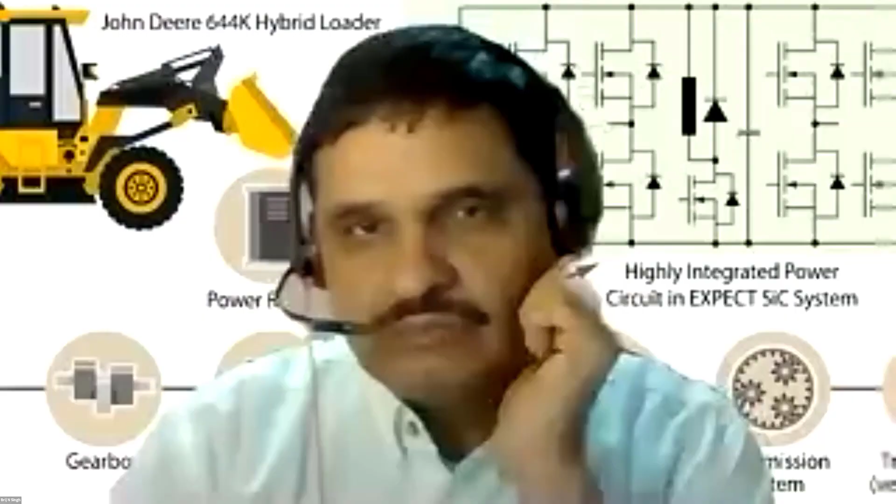I will turn the floor over to you. So Mark, you may go ahead and share your screen. All righty. While we're transitioning here, I just wanted to say thank you for the opportunity, and big thanks to the Purdue team for continuing to crank out really good talent.

So for the next 10 minutes, I'm going to provide an overview of why automation and autonomy is important to us at John Deere and our customers. As we get started, I want to share our mission statement or purpose at John Deere, which is to make our customers the world's most profitable and sustainable in their industries.

And what this means to our customers, and why it's important to them, is because they have a huge task in front of them: not only to be profitable and sustainable, but also to feed, fuel, clothe, and continue to build infrastructure for a growing population. This is a noble and real cause and mission that we're on to support them in doing.

So our farming customers - farming is a challenging job. There are lots of different variables that come into play when you are setting out to grow a crop and take that crop off the land. It's a race against time. Not only do you only get about, the average farmer gets about 40 times to get it right throughout their lifetime, but it's a timing race within each growing season.

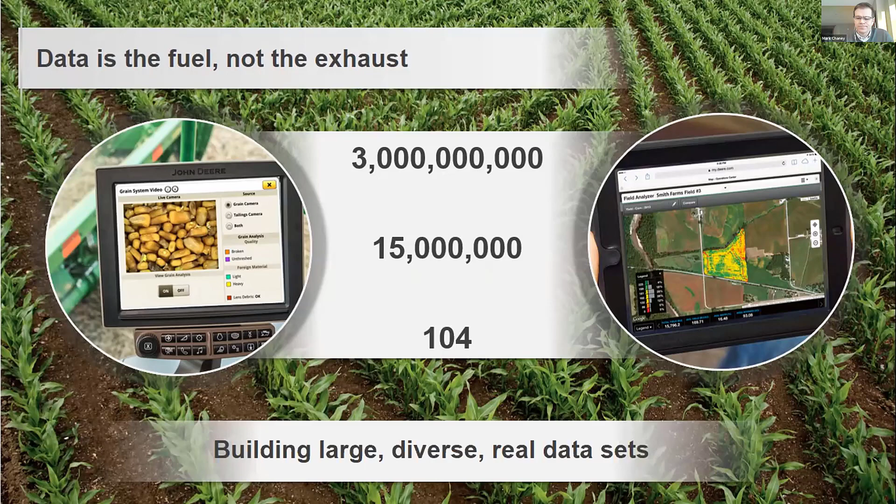From a decision standpoint, we are really changing the landscape of agriculture with the use of these new technologies. And whether it's at a field level, a plant level, or across their production system, we are starting to be able to make decisions in real time to aid them to understand when is the right time to get that seed

in the ground, or what's the right time to go spray for a pest. And all this builds, like I said, across each step to help them make the best crop they can make out of that season and when to harvest it.

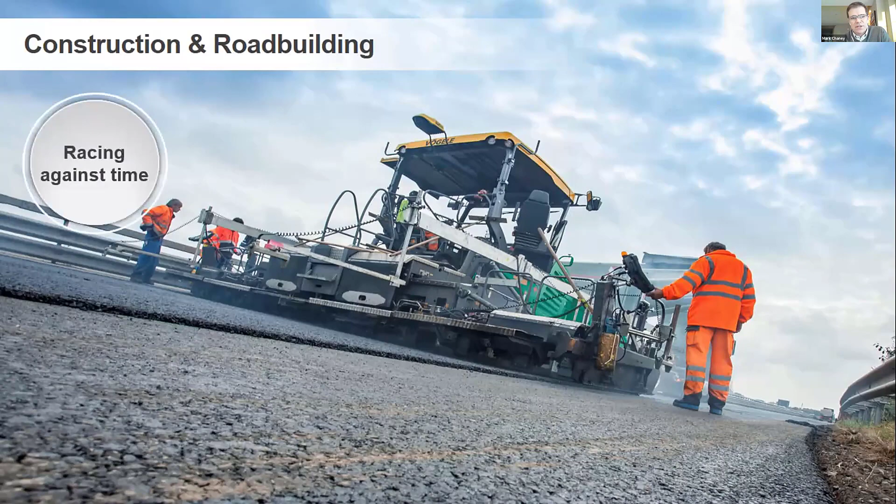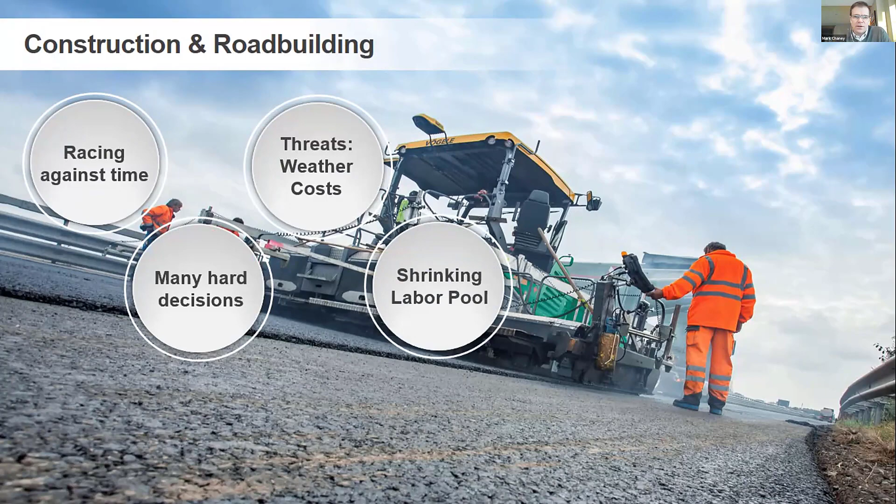Now switching gears to our construction and road building customers, you'll see some similarities here where they have very similar challenges, whether it's time, weather, costs, the decisions they need to make timely, and the labor. So a very similar landscape and challenges for them.

We are also working with them to bring this technology into their industries to do much of the same, as the need is great. They are fighting different challenges than our ag customers, but we are actually leveraging a lot of the same technologies across their businesses as well.

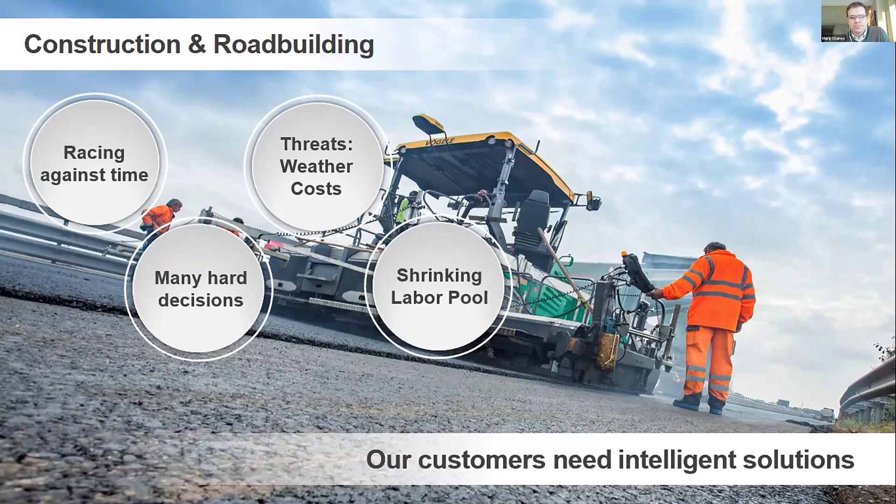Safety is a big deal with our construction and road building customers, and it is one of the number one areas we are working on with them to apply this technology. And that is why you see one of the technologies in front of you here, where we're leveraging a technology that can look behind our equipment, provide alerts when obstacles are near. And this is just the start of this.

Just imagine how we can continue to apply computer vision and machine learning technologies to make job sites and work sites safer.

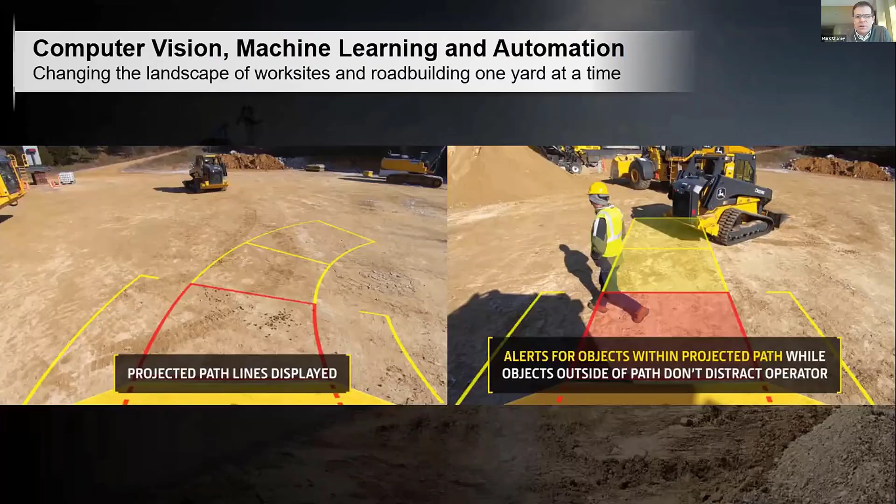Now I want to show you a little video about our acquisition with Blue River Technology and the work they're doing to revolutionize agriculture.

We're seeing lots of resistance to Roundup. We're looking for other ways to combat the weeds and still have cost savings on top of everything.

We saw an opportunity to take cameras, computers, and artificial intelligence to allow ag machines to see every plant in a field. We thought we could give farmers the ultimate flexible tool to treat and manage their field in whatever way they wanted, by having knowledge of every plant and its situation, and an ability to spray very precisely, whether it be herbicide only to the weeds, or fertilizer or fungicide directly on each plant that needed it. Each field has a different set of conditions, and they need to adjust and correctly set that machine's performance for the field.

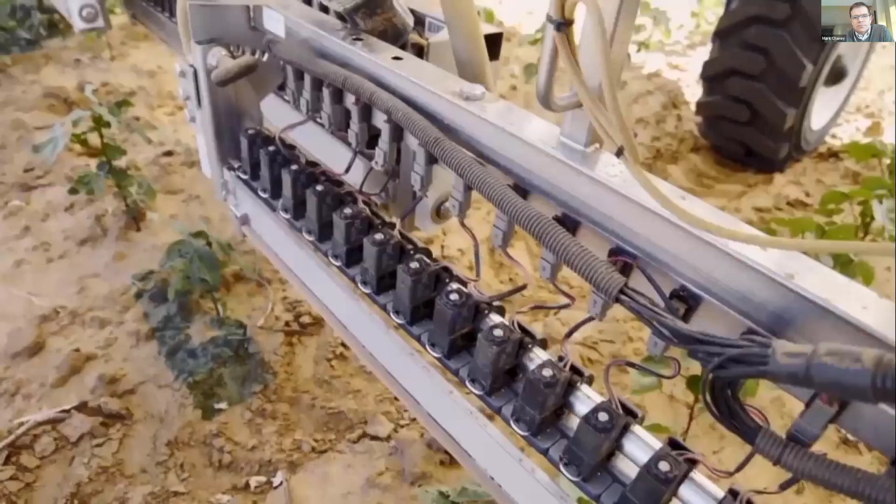One knob could be the protection of the cotton plant and how big of a buffer, a safe zone, we provide the plant so that when we apply selective or non-selective materials, we have the appropriate buffer.

Another dial is how aggressive do you want to be at going after anything that looks like a weed. There's also opportunities to inform the grower of how many weeds the system's seeing, even what kinds of weeds exist in the field, so they can start to tailor their herbicide programs towards those weeds.

The cameras and computers on a See and Spray machine use deep learning algorithms similar to what's used in facial recognition. The first time we saw a pigweed, the machine didn't know what kind of plant it was, but we taught it by giving it tens of thousands of examples of that pigweed, and now it's an expert in pigweed.

We save up to 90% of the amount of herbicide that you would spray if you were spraying the entire field. The weeds have become a little bit more of a pest than they were originally - they've become resistant to a lot of the herbicide we've been using on them.

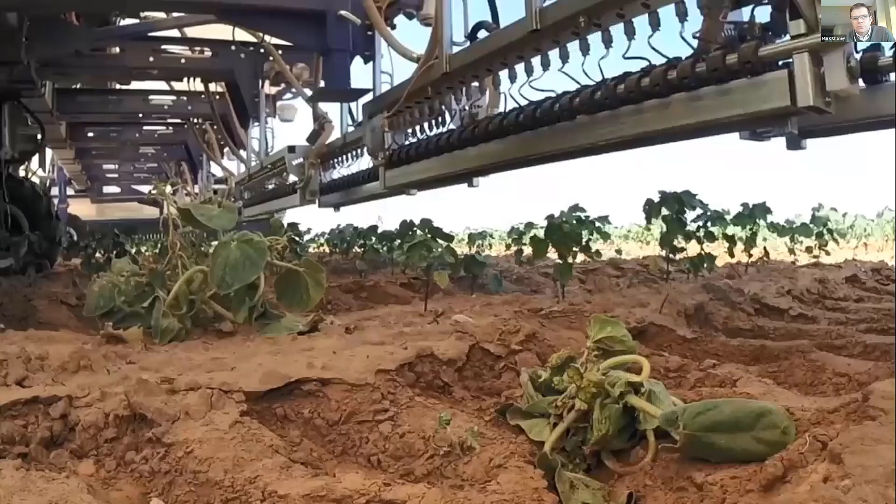With the rig, we have other options open to us. We can spray different chemicals that we weren't able to spray before. We can take one man, put him on a tractor, and do the work of 8 to 10 people. We're seeing no end to the use of this technology.

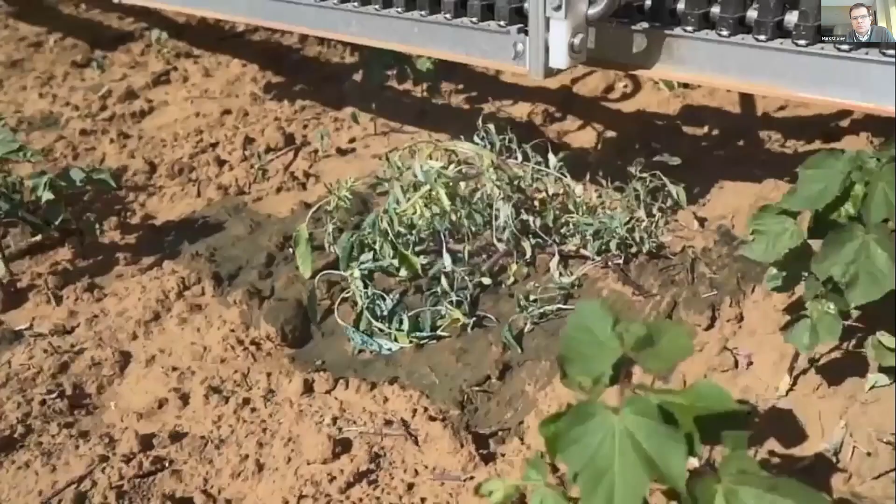Essentially, anything that may be cost prohibitive or more difficult to do when spraying on a broadcast basis becomes much more grower-beneficial if we're spraying on a very precise basis.

So you can see tremendous opportunity for us there, and some awesome work being done by the teams at John Deere and Blue River to revolutionize our future in ag, construction, and road building for our customers.

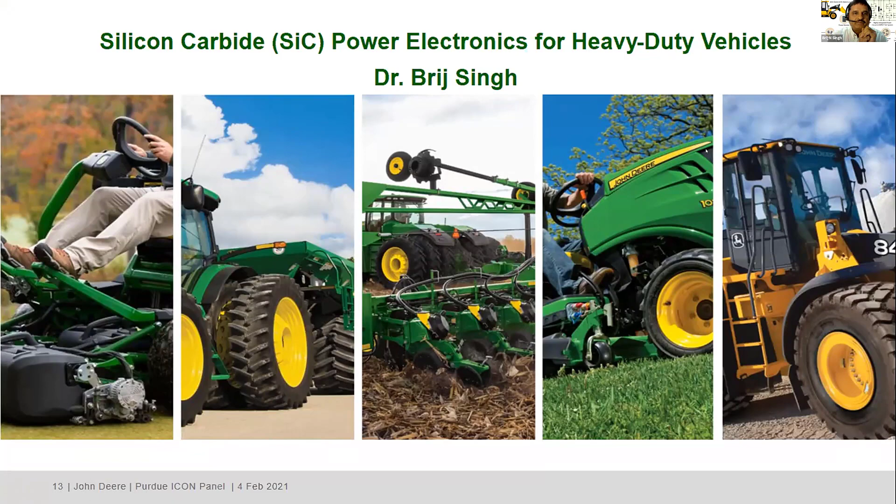So we are committed to those linked to the land - that is our slogan. And it's a demanding application of power electronics. Failure is not an option for our vehicle, because when a vehicle goes down, there are numerous other vehicles waiting for it, so everything is down. Failure is not something we think of.

Whether it is silicon or silicon carbide, customer expectation is high. It doesn't matter whether you are putting in new technology or adding something additional to the existing technology - you just cannot get away from customer expectation. So what that means is we have to have ruggedized power electronics with enabling control technology so we could pass on customer value.

And I'm not going to play the video, but using this link you could look into the various aspects of this vehicle. Next slide.

And this vehicle, as Mark is advancing, has seen at one customer site 1 million field hours, that established the reliability of the vehicle, the power electronics that we developed in the 2007 to 2010-12 time frame. Control system prevents near zero speed, tire spin, and slicing.

The reason is that this is one of the core benefits of electrification that we did not initially think of. So in emerging or advanced technology development work, we oftentimes find the customer value when the product gets in the field. If there's any possibility, some of these things can be understood upfront. This vehicle has established industry-leading reliability goals through advanced control, power management, and all that.

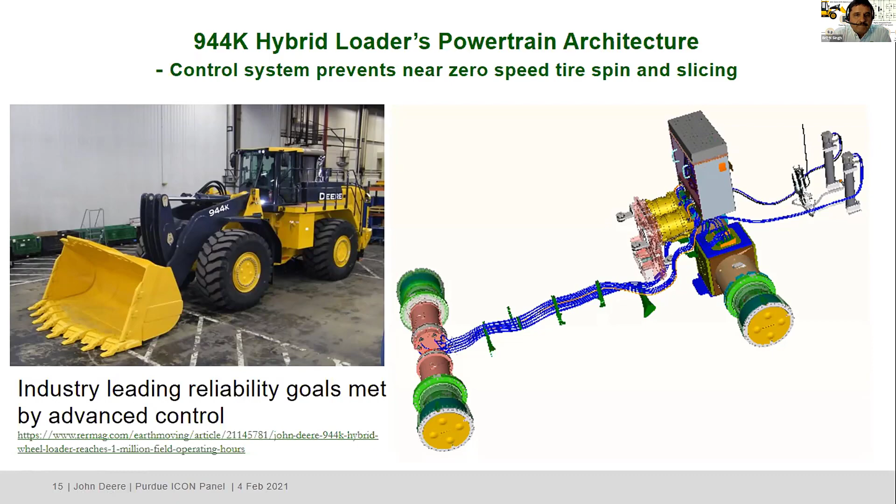So when we began silicon carbide technology development work in 2015, we were given a very aggressive target. It was funded by the Department of Energy, and we had not done anything silicon carbide related before. Silicon carbide is a very advanced material with its own challenges related to packaging, thermal management, and gate drive, and things like that. So I'm not going to read all these numbers, but there's a very high efficiency target, miniaturization of the powertrain - it's an extremely power dense converter.

In addition, we're going to engine coolant, because in our vehicle there are numerous cooling loops, and every one of them has its own, what you'd call, risk options - like failure could be a possibility if you have a dedicated cooling loop, particularly an electrical pump. So the idea was that if we could eliminate the dedicated cooling pump for the inverter, that would be a big value, particularly for system integration. So we qualified this inverter to run on engine coolant up to 115 degrees C.

So what I'm talking about here is 130 degrees C ambient electronics, and that has to meet that 1 million field hour reliability, right? So this is an extremely challenging problem.

Silicon carbide advanced technology is an emerging technology for off-road vehicle applications. There are some risks - one risk is that it's new in our field of use, because we've established a leadership position in electrification. For agriculture, we're doing the ExactEmerge planter, which Scott will talk about and Mark has mentioned, and also on the construction side. So we want to retain that position by working on advanced technology, mitigating risk, and understanding supply chain issues. Once we've established the competitive advantage, it can be put to greater use.

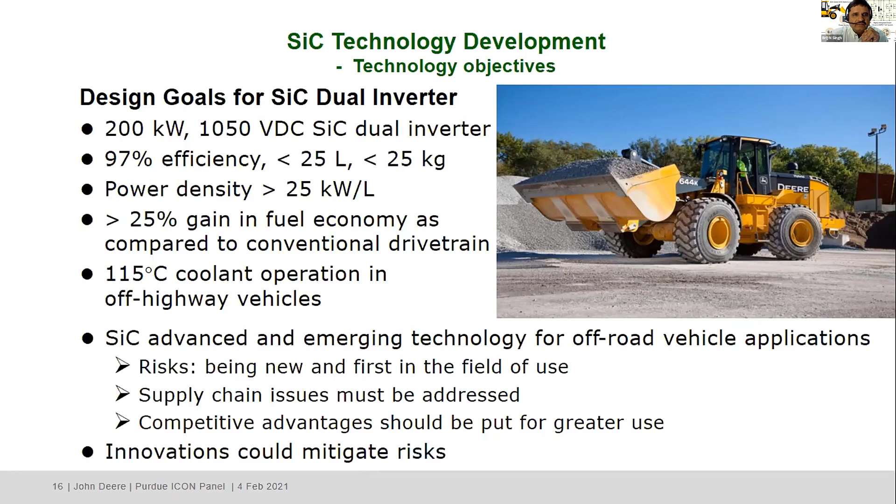So what you see here is the progression of power density. Looks like on my side two boxes are missing - I don't know, Mark, if you have it or not, but you have a PDF copy of this presentation, so you can look through that.

So if you look at these inverters, all of them have identical capability, each 400 kilowatts. And from one inverter to another, every 5 years we are cutting inverter size in half and increasing their power density, coolant capability, and also performance. At the same time, we are reducing the cost of these inverters, which is an extremely challenging problem. But it comes with a benefit - the smaller it gets, the better it becomes.

What that means is, since we're not a very high volume business, once you establish one inverter and pay down all the development cost, software, and everything, you could use the same inverter, same hardware, to capture many vehicle applications - that's what modularity means. So all of a sudden you start enjoying the economy of scale.

Increasing power density gives competitive advantage. Why is that? If the box is smaller, it's a lot easier to put it on the vehicle for system integration. It's not just an inverter, it's going to enable a vehicle function. That's why miniaturization is extremely important.

It comes with its own challenges, particularly packaging and thermal management. In addition to that, there's the control aspect and qualification and things like that. And improved performance at high temperature gives system benefits. As I said earlier, engine coolant elimination makes the vehicle system integration much easier.

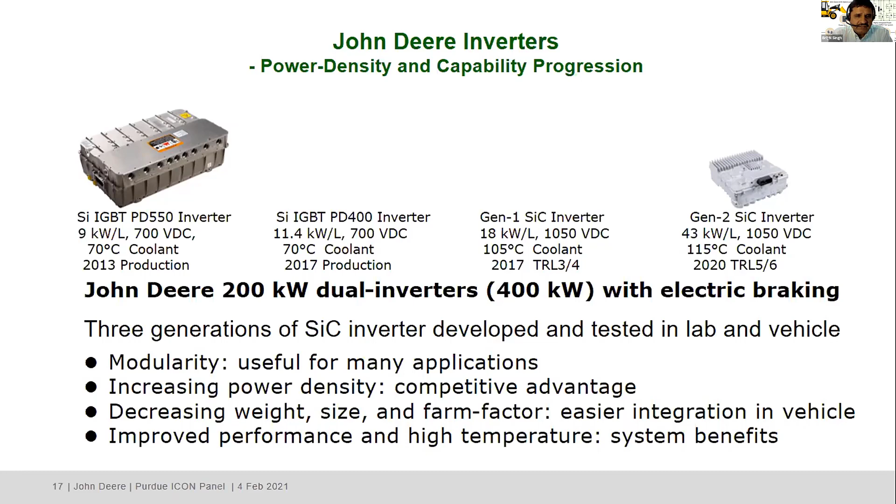I want you to comprehend the scale of this. So you can imagine this inverter has gotten so small that you could measure it in terms of an iPhone. I was curious when this box came to me, and I measured it against an iPhone. They are reducing in size and weight, and it's comparable to an iPhone now - less than an iPhone in height, two iPhones deep, and left to right almost two iPhones. So it's very, very small.

What I'm trying to indicate is that maybe the next inverter five years down the road may look similar to an iPhone, and that's where the Department of Energy is also heading. We have 43 kilowatts per liter power density. The Department of Energy's next goal is 100 kilowatts per liter power density.

If you look at per capita US energy consumption, it's 10 kilowatt-hours per day per household. What that means is this box, such a small box, can process electricity worth 40 houses. Now comprehend a power substation around a house - how big that is versus this little box can do that.

On top of that, this iPhone-sized power module inside can handle electricity worth 20 houses. Now you should comprehend how challenging the packaging, thermal management, and control problem this has. We are trying to solve these through innovation.

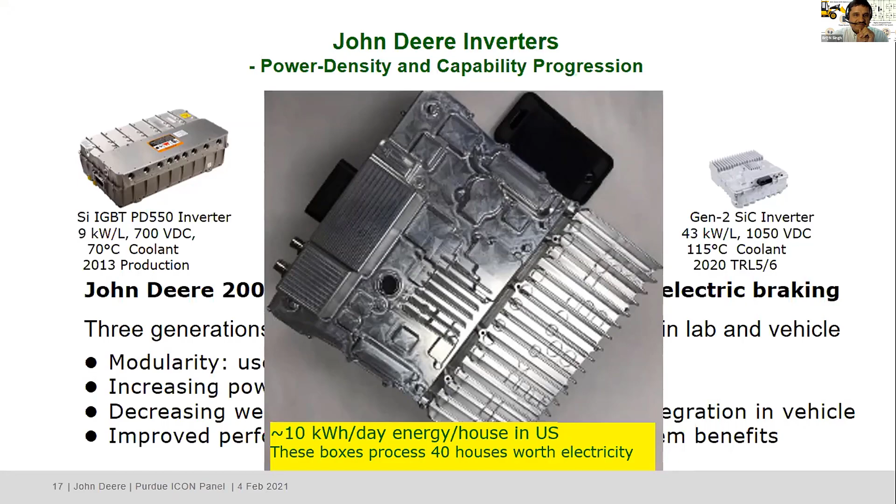This is basically the comparison of all our three inverters. When we began in 2015, this is another aspect - when you're working on a technology that may have risk, with not a lot of data out there, how do you mitigate that risk? This project taught me that.

What we did was take one of our IGBT inverters and did impactful work very early on. That means with no knowledge in silicon carbide technology, control, packaging, thermal management, devices, gate drive, and all sorts of things, within 9 months we were spinning an electric machine with the silicon carbide inverter. That tells you that very early on we were mitigating risk and putting our resources toward it, and time is of the essence.

So if there's risk and you could mitigate it, and you found out that no, this is not mature enough, maybe we should slow down our development progress. This project taught me that - mitigate risk very early on, and then intensify development effort.

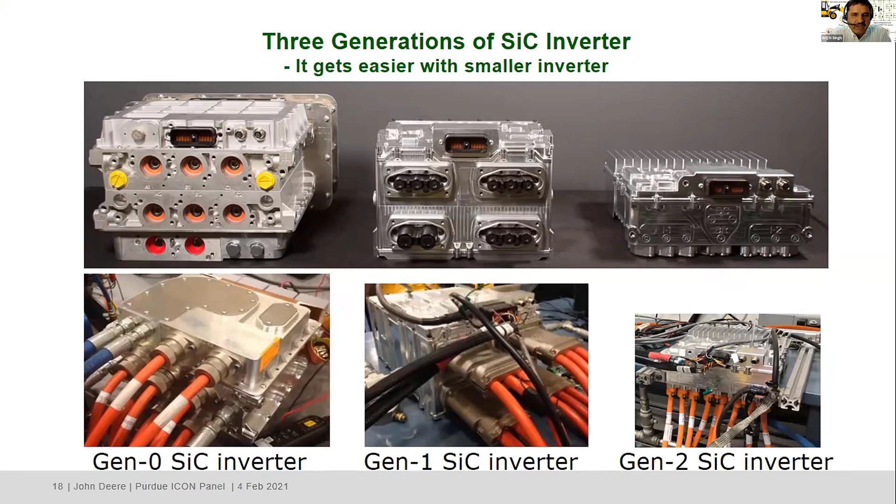Within 4 years, we've gone from a very huge box on the left to a very miniaturized inverter on the right. Look at the bottom three pictures - how much easier it is to connect the inverter with the motor or electric machine. It's easier integration on the vehicle, and miniaturization gives that advantage, but it doesn't come free. It comes with a lot of challenges - solving thermal management, packaging, control aspects, all that.

I often get asked: these are hybrid vehicles, the 644 and 944 loader - what is the battery size in this vehicle? The answer is there's no battery, only the start engine, a 12 or 24 volt battery. The reason is these are energy guzzlers. As I said earlier, the 944 consumes 9 gallons per hour of fuel; the 644 may take about 4.5.

You just cannot get a battery to keep working for 12 hours, and the 944 may work 18 to 22 hours non-stop per day. So what that means is you take this drivetrain - engine, gearbox - generate electricity on board, and then the transmission system, that's where the magic happens. This gives the operator huge flexibility through vehicle power management. Automatically, software algorithms control and let the operator pay attention to the work versus how the vehicle is operating. So a lot of automation is helping us make the operator much more productive and performing, versus paying attention to how the vehicle is working.

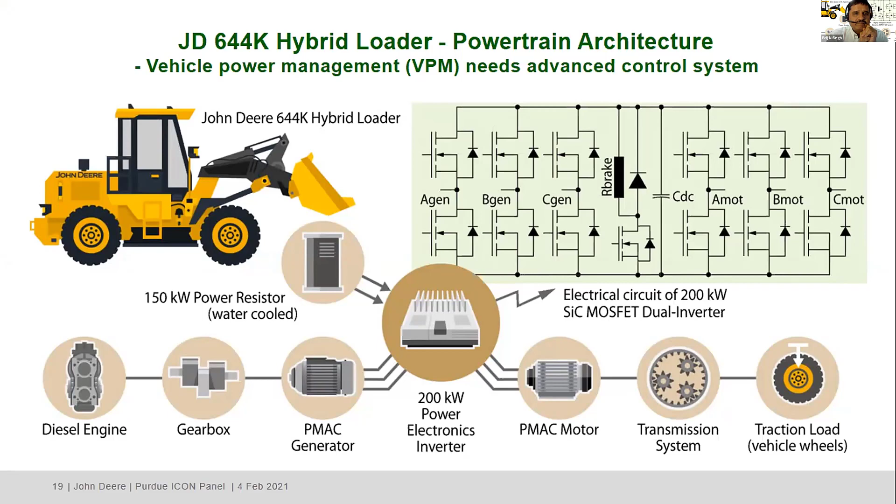So that U4 boxes that you saw, PD550 to Gen 2 silicon carbide inverter. What we did for miniaturization, one aspect was we reduced the amount of capacitor we put on the DC bus, going from 13,000 microfarad to as little as 440 microfarad without compromising performance, capability, and all aspects. How could I verify that yes, that is the right thing to do?

So we do a lot of simulation, hardware in loop simulation, Simulink simulation, followed by some experimentation in the laboratory, and then improve our control system, hardware, and all that. And that's how we checked out that yes, indeed, going from a very high value capacitor to as little as 440 gives us a power density advantage.

But then in addition to that, if I want to change torque 1000 Newton meter per millisecond, because that's how operator expectations are, customer expectations are, how can this do that? There is a lot of advancement in software needed to make sure that yes, this little capacitor, 440 microfarad, is good to go.

And what we do, basically, is a multi-machine, multi-inverter setup to pretty much simulate vehicle condition in the live environment before going and putting hardware in the vehicle. Next slide, please.

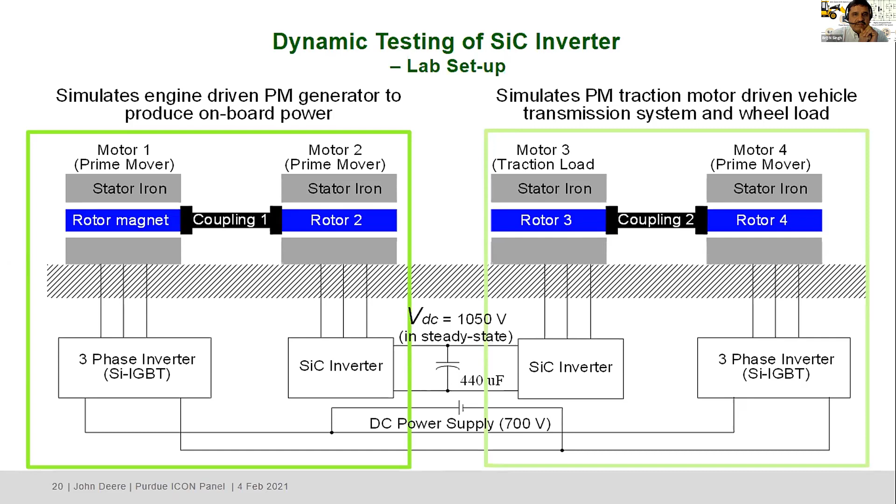Next slide, please. We have 14 such dynos in Fargo, North Dakota, where we do electrification related development work. The vehicle operator, particularly construction and mining vehicle, day long, they are going high power to low power, stop, start, as you're digging the pile, which is very, very taxing on the power electronics. So it has to be ruggedized to withstand those operations.

So testing it, if I quickly change the power from 30 kilowatt to 150 kilowatt, what happens to the particular DC bus, because it has to remain stable to provide 1000 Newton meter per millisecond torque change. And we found that yes, we can minimize that capacitor as little as it could be, and it reduces the inverter cost, makes it power dense, but at the same time, no compromise in the performance.

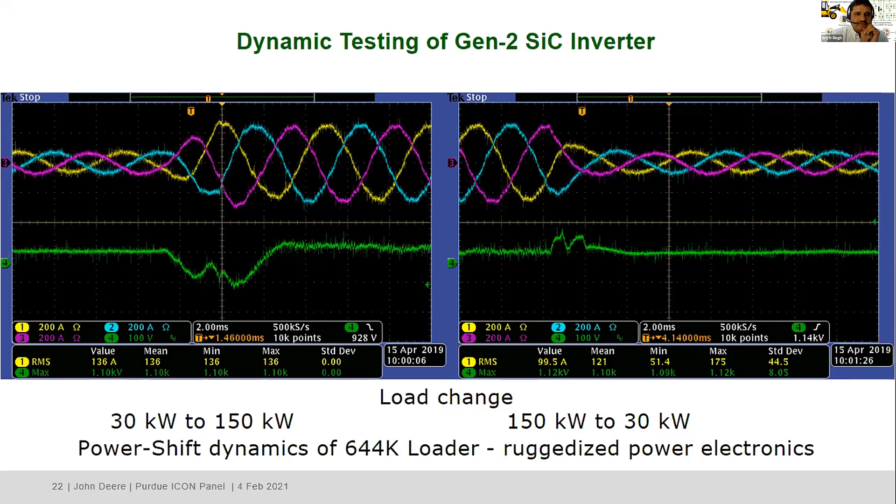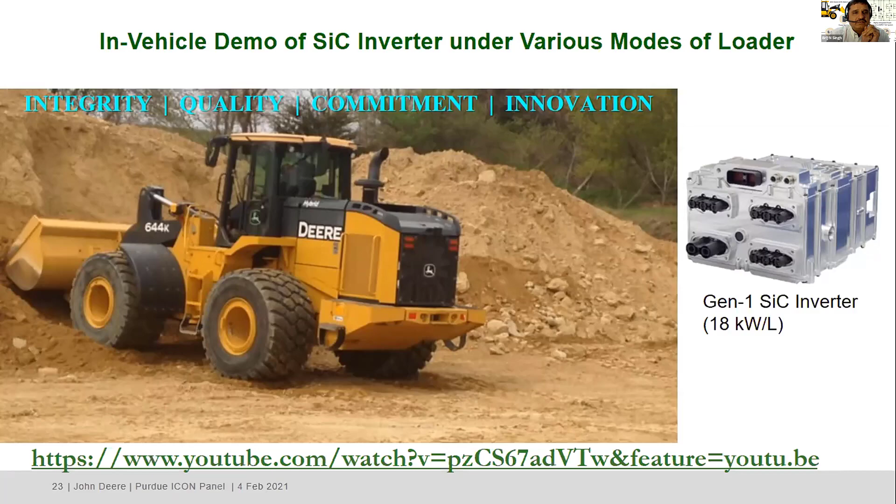So in conclusion, silicon carbide power train is real. That's what we found out by doing a lot of benchtop testing, back-to-back dyno testing, in-vehicle testing, and we have roughly 3,500 hours of experience.

We believe that if you take a system approach, we could get, by 2025 or so time frame, this technology will start competing, but it could go into some niche application, like a battery powered vehicle could be one application, or maybe where motor inverter integration are a must, there it could go.

And then another aspect, from supply chain, we found that as compared to silicon, the traditional state-of-art technology that we have in 644, 944 loader and other vehicles we're working on, even if there's a 3x cost at the device level, at the system level we could get a cost neutral or cost superior and performance superior solution. So we have to take the system approach to do that.

And certainly there's a risk in this new technology, because on highway, like a Tesla Model 3, will be there. But in our industry, nobody has a record of proving this technology on the vehicle. So there is certainly risk of doing this emerging technology. But this risk, if you mitigate that, this gives us competitive advantage that outweighs the risk of being new in the field. And then we want to retain our technology leadership in electrification.

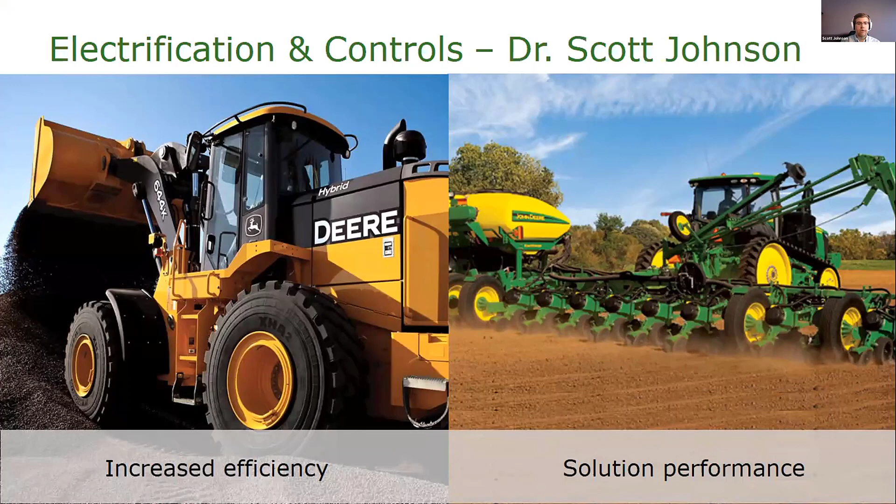In terms of power management, the goal once we've electrified is to get the performance that a customer needs. Keep in mind these customers are staking their livelihood on this vehicle - their day-to-day income is coming from a vehicle like this. So it's critical that they still have the performance they want. With electrification, we've actually added some performance. In particular, for a customer, they care about how much they can put in that bucket, and the power you can put in the fingers of that bucket really makes a difference.

So how can we deliver power from this powertrain to do that? I mentioned the 4 wheel motors - there are 2 generators on this vehicle powered from the diesel engine, and we call this vehicle a hybrid. You might ask, where's the battery on the vehicle? The answer is we don't need a battery to do things like energy recovery, because even though we're aggressively filling a bucket full of dirt, backing up and going forward again, we have loads - places to use the power we can regenerate. We have hydraulic systems actively lifting that bucket that we can assist with the energy we've recovered from the wheels. So we can improve efficiency without a battery to store it, because we're still net consumers of power.

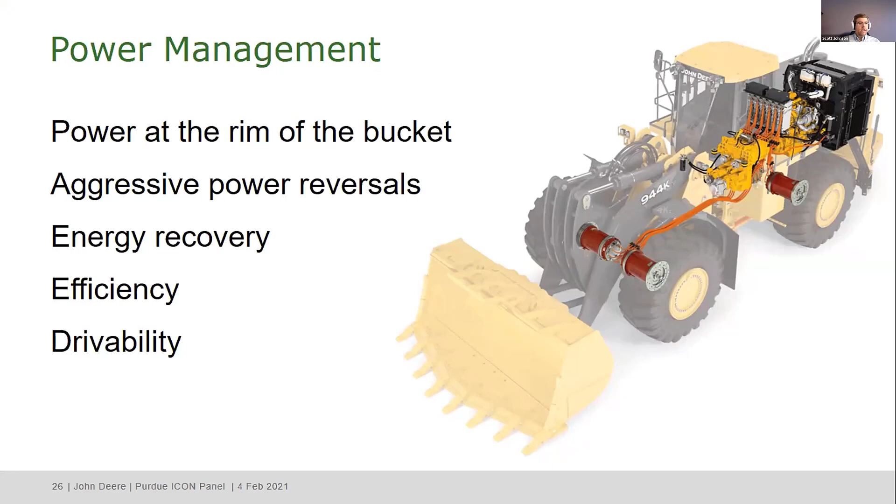We also have other dynamics we have to deal with, like buildup of corrosive materials when people clean the vehicles, or things like grass clippings for our electrified golf equipment, which can cause plugging. We have to figure out how to design the algorithms to either push through or protect the mechanical equipment so it can be cleaned and not be damaged. Extreme cold, dust, debris—robust controls and robust power management are a really cool aspect of working at John Deere that I have enjoyed.

The variety of the different applications and getting dirty going in the field is also pretty fun. Typing a couple lines of code and then feeling the vehicle move differently—not every company you get that. So if you can go to the next slide for me, Mark.

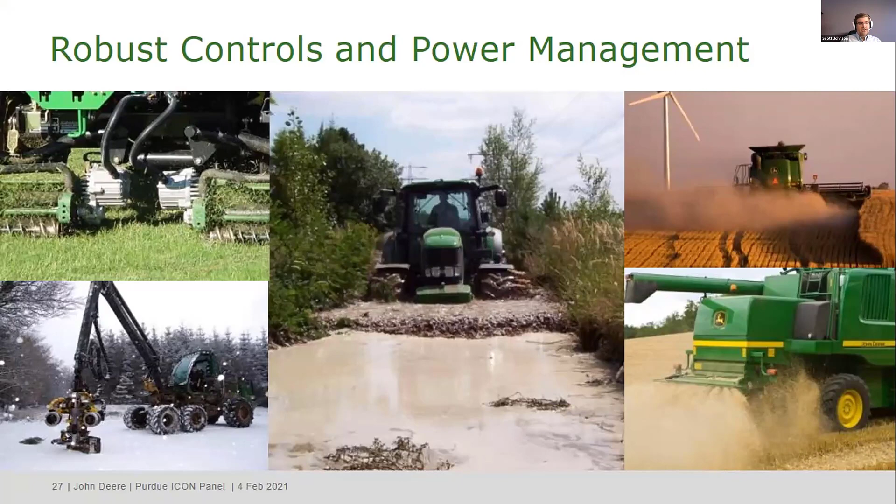Switch gears for a second here, talk about precision ag. The ExactEmerge planter is our premier planter today, and it's used for row crops. Critical to these customers is the precision planting of those seeds in spacing and in depth. Everything about how that seed goes in the soil is critical to how that seed grows and then how much yield we get out of it. Corn and soybeans are typically what's targeted, but this plants other seeds as well.

To get an idea, an average farm will have 350 million plants in it. This planter and tractor can plant 700 corn seeds a second, or 2,800 soybean seeds a second, while running 10 miles an hour in a field. And if that doesn't feel fast, put yourself in a tractor going 10 miles an hour over this kind of off-road terrain—you'll feel like it's faster than you expected. I'll put it that way.

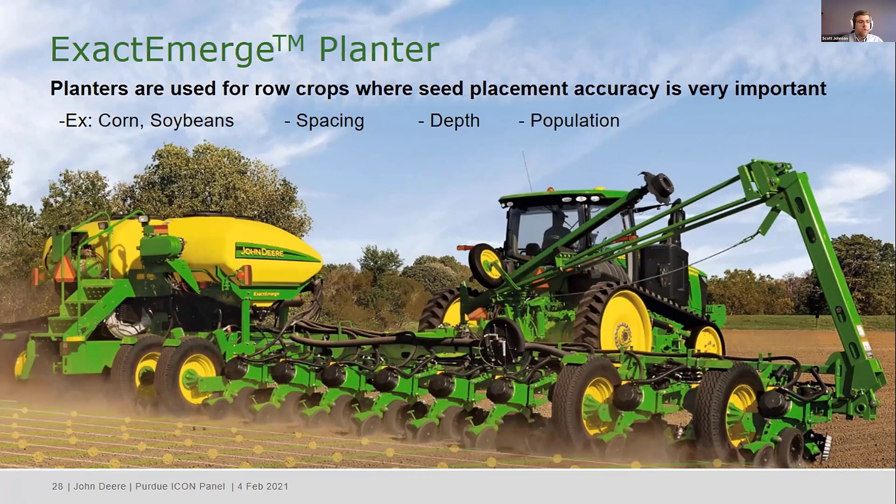It is incredibly fast. But even while we're going that fast, we're able to keep the precision planting of those seeds at the desired 6-inch or 7-inch spacing. And that's where the controls really come in. So if Mark, you can go to the next slide, we're going to see a video here just to give you a picture of the components of this, and we'll talk through a couple of things. So yeah, go ahead and play it.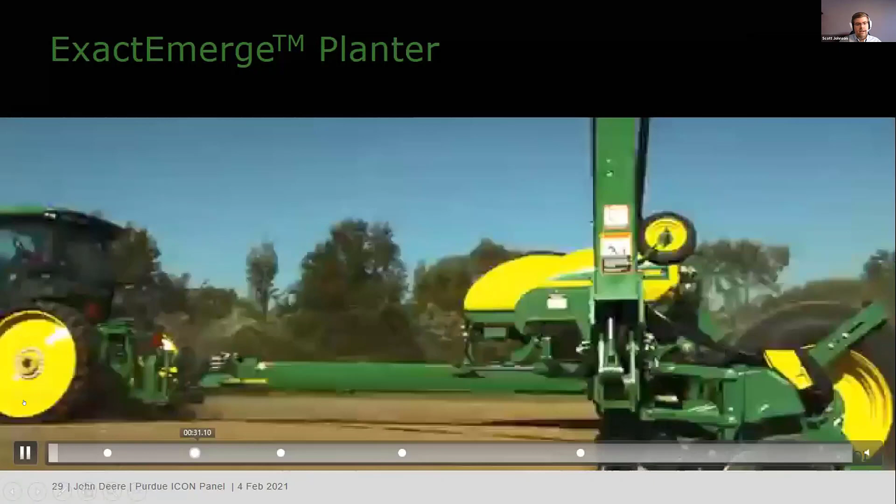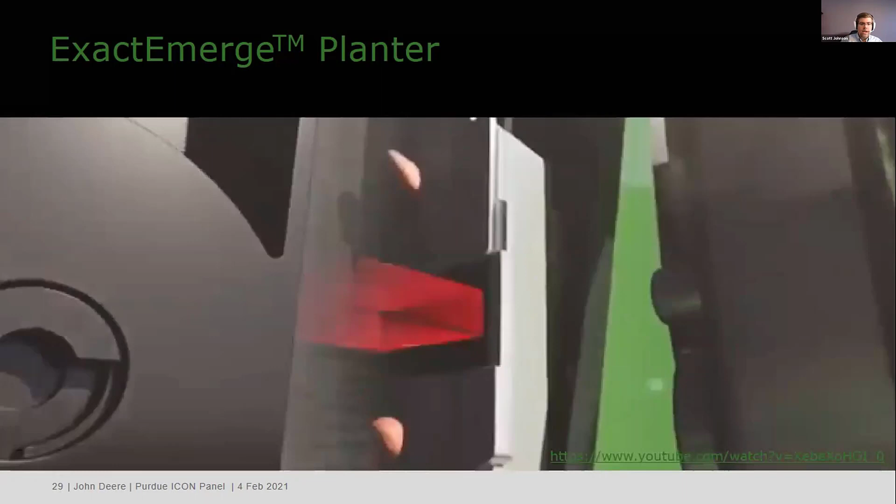Moving up, John Deere has an incredible number of sensors. On a normal 60-foot, 24-row planter, there's 300 sensors and 140 controllers, taking about 15,000 measurements per second. We can count the seeds as they're moving in this brush and delivering them to the ground. That gives us incredible information about the analytics of what's going into our field and allows us to do advanced controls to make sure that we're getting that precise placement in the ground. Go ahead.

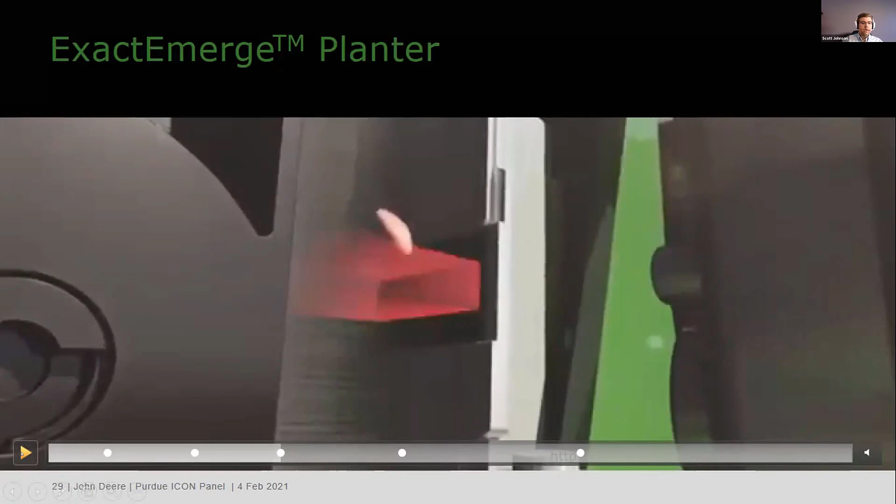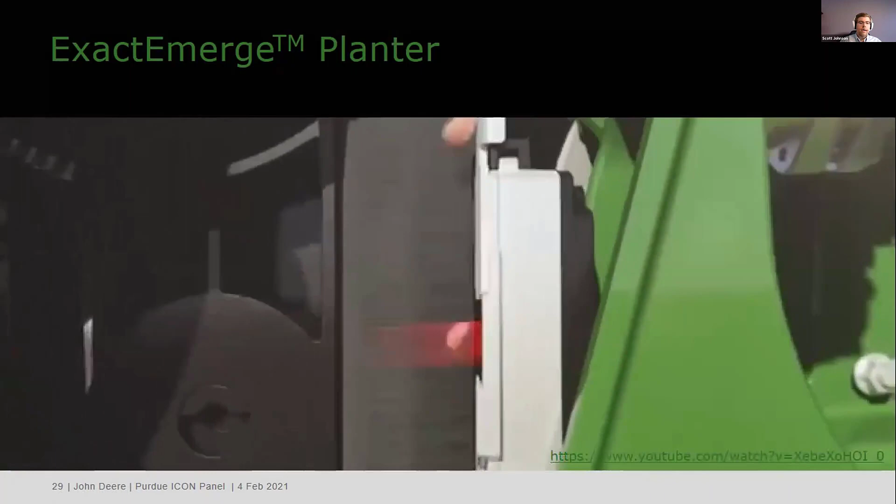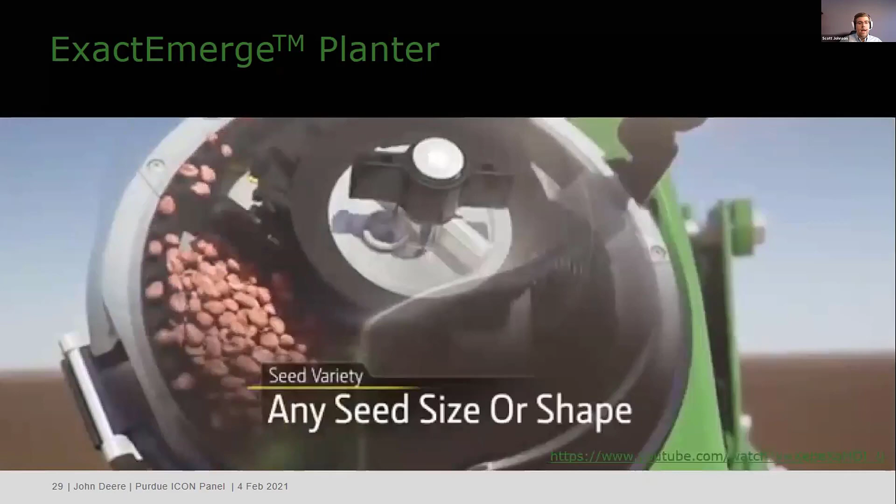So I talked about the two electric motors that are controlling both the delivery of the seed with this brush, but also the singulation of the seed in the metering system. You'll see this come up here in a moment where you take bulk seeds and singulate them using this meter design that includes a vacuum. The motor is spinning this bowl and needs to accurately be putting seeds into that brush at a rate that matches the rate of the vehicle.

So being able to reject any disturbances as these seeds are being singulated is one of the critical things for the control algorithm in that motor.

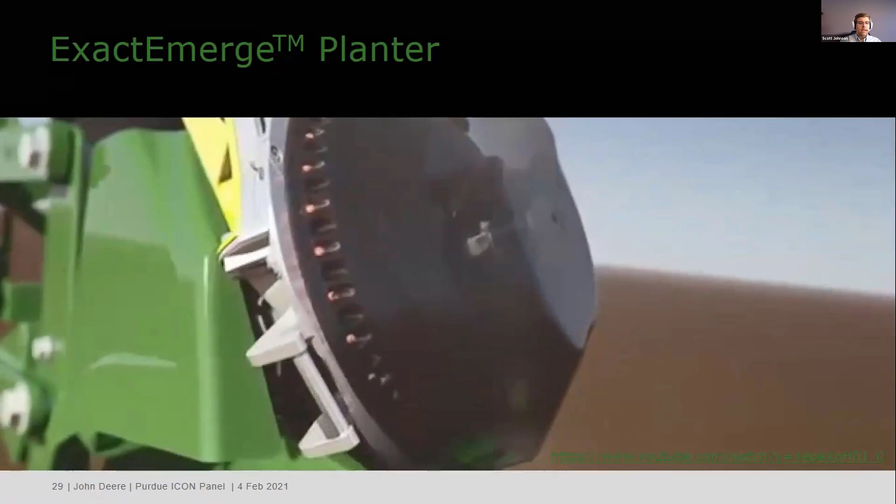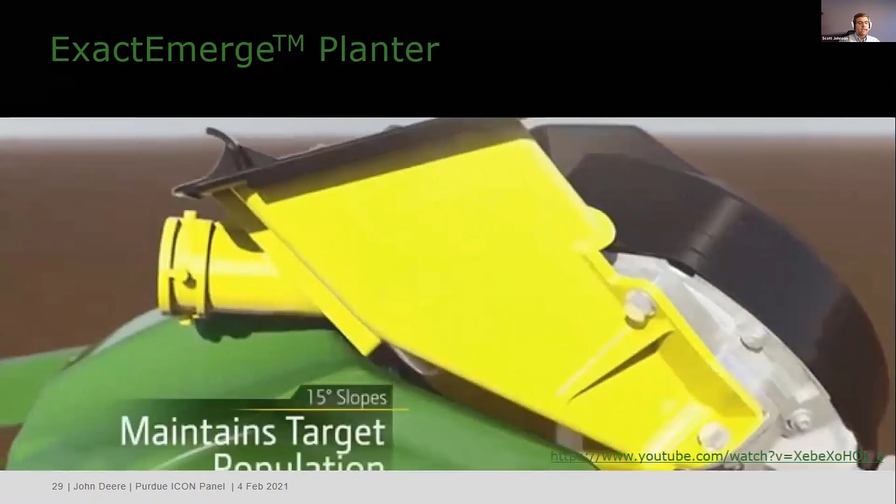So the motors that I keep talking about will be shown here in a second. You'll see the mechanical design for how they're connected. The algorithms that I write day in and day out go inside the inverters that control that. I think Brij did a great job sharing how the bigger inverters look. The smaller inverters are also very capable and need to survive an entire lifetime in the field. So the components again are very ruggedized.

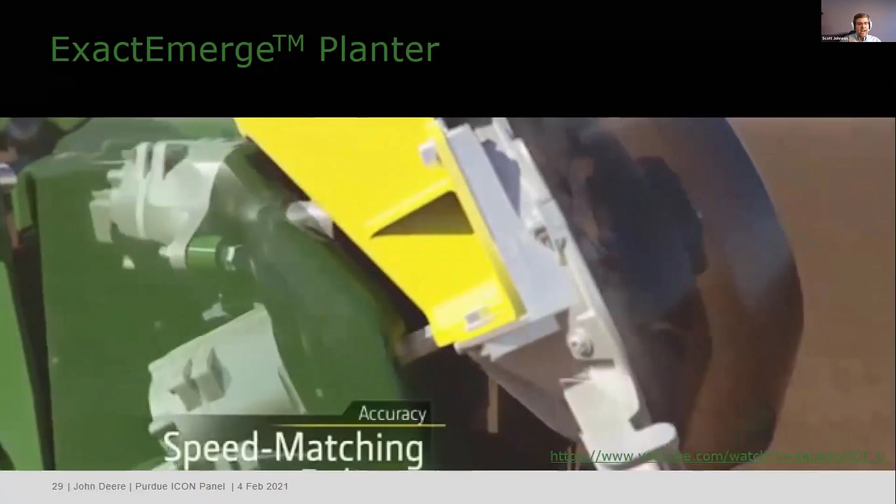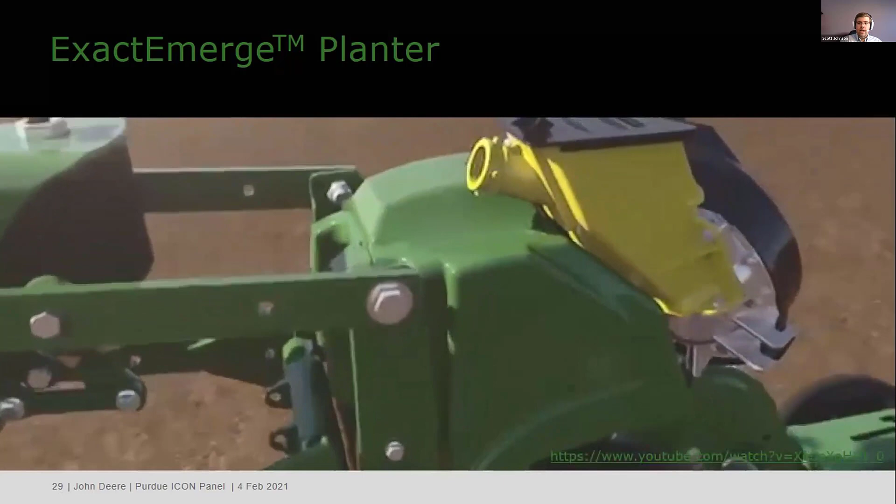So that's the system, the ExactEmerge planter. It's quite an innovation box, I think. We see this ability to control how the seeds are being delivered in such a modular sense. It really opens the door for the future where we see more and more precision agriculture, more controls that are going to enable it, more technology that we're putting on the back end of these planters. Because at the end of the day, this determines a lot of the farmer's value. This determines how much money they take home. So it's become quite an enabling technology for farmers and quite an opportunity for John Deere.

So you can go ahead and finish that slide. That's all we have from the Deere side. So I encourage you to look into research or consider working for a company like Deere, where I think controls do incredible things, both building and feeding the world.

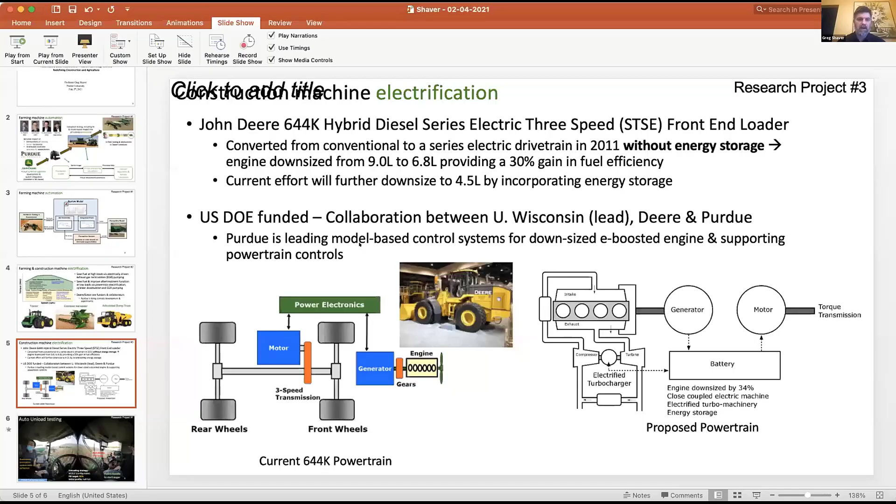Sorry, bad jokes. Okay, can you see my slides?

I'm going to talk about some research collaborations underway between Purdue and Deere that hit automation and electrification for construction and agricultural equipment that Deere is bringing to market, or will hopefully soon.

This is a project that's actually winding down, so we're in a transition mode. All the technical work that Purdue was going to do, that Deere asked us to do, we've done, and now we're transitioning the work into Deere, which is also a very cool part of our interaction - making sure that the tools and techniques we developed are getting into the hands of the Deere engineers and software folks who are going to take it to a production intent machine.

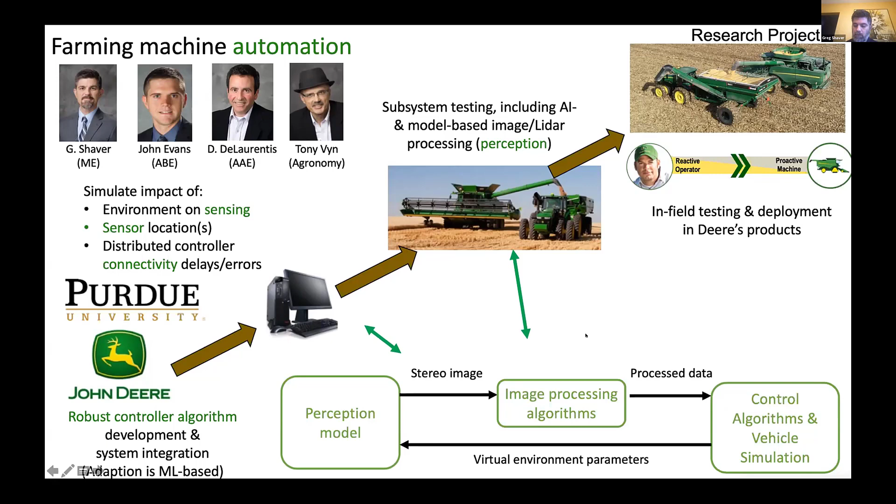So we simulated and implemented those. Here's another way to look at that: we developed first the simulation capability and then algorithms within MATLAB Simulink. We designed our algorithms and implemented them in MATLAB Simulink, which is how much of industry pushes them into their microcontrollers, how they embed them. So that's a good fit.

We did both experiments, but also a lot of virtual work. The Unreal Engine, which gamers in the audience will recognize as a sophisticated tool for gaming visualization, is also pretty sophisticated in the vehicle automation space. We unlocked that capability to capture the scene where the vehicles are, how they're moving relative to each other, under the action of the dynamics of both - F equals MA, if you will - as well as our algorithms, and how that affected what the camera and/or the LiDAR sensors saw.

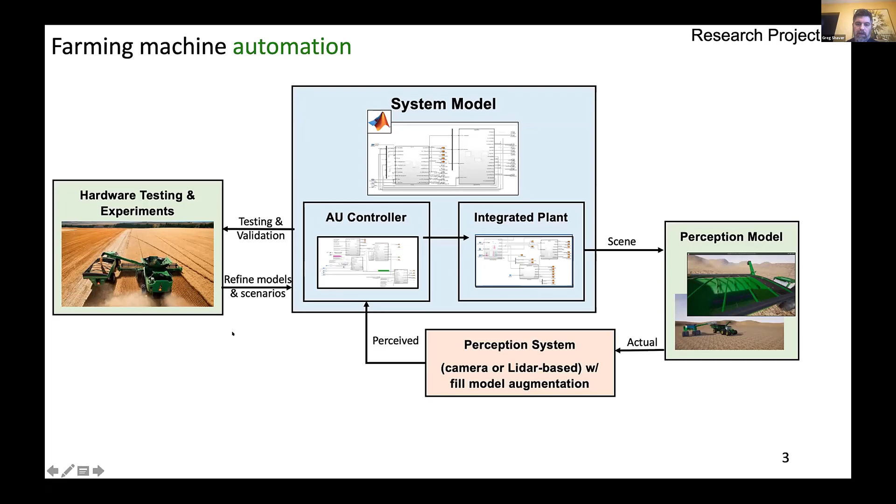Then we developed algorithms and simulated them and used that for feedback. What we implemented on the vehicles themselves is the auto unload controls and also the processing from the actual sensors, coupled together with hardware testing and experiments. So we certainly didn't just do simulations, we didn't just do algorithm or perception algorithm development, and we didn't just do experiments - we worked all these things in parallel and they played off each other.

So that's the first project, and that project's winding down, but we're very excited about it. We're working on another patent - we've already got one filed with our Deere collaborators, and we're working on a second one now. There'll be some good journal papers and great thesis chapters that come out of that work too for our students, and those students are being heavily recruited right now by Deere. It's like the perfect moon alignment of everyone's interest, and we want to keep that going.

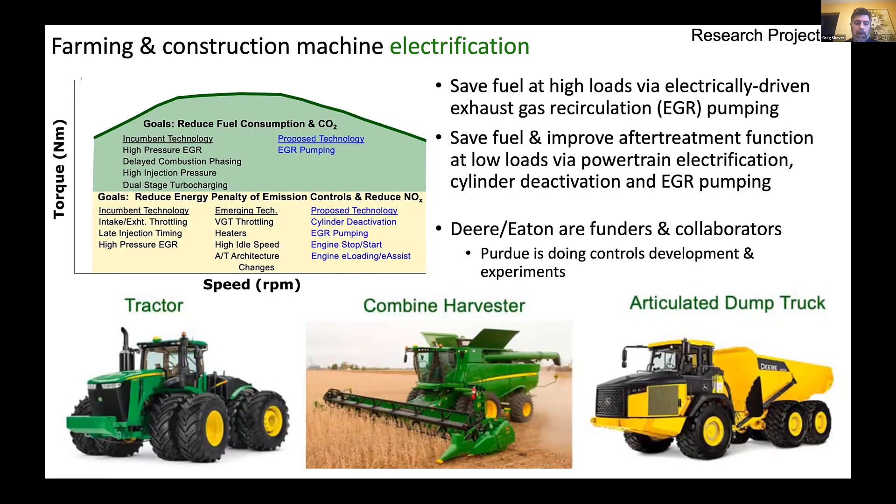Project 3, this is a project funded by the US Department of Energy. This is a collaboration between the University of Wisconsin, Deere, and Purdue. Wisconsin is doing a great job of leading this effort.

Purdue focuses on model-based control systems for a downsized electrically boosted engine. We're also going to be supporting powertrain controls work that Scott is leading, as I understand. So it's going to be fun to work with you on that, Scott.

That's work that Deere has already done, and it's a product they sell. The current effort being funded here by DOE is to allow further downsizing of the engine all the way to 4.5 liters, we hope, by incorporating energy storage into this vehicle and through the coordinated controls of what the engine's doing and what the powertrain's doing.

So very exciting. This experimental work is already starting to happen at University of Wisconsin. There will also be a vehicle implementation effort that Deere will lead. So I think that's probably my time.

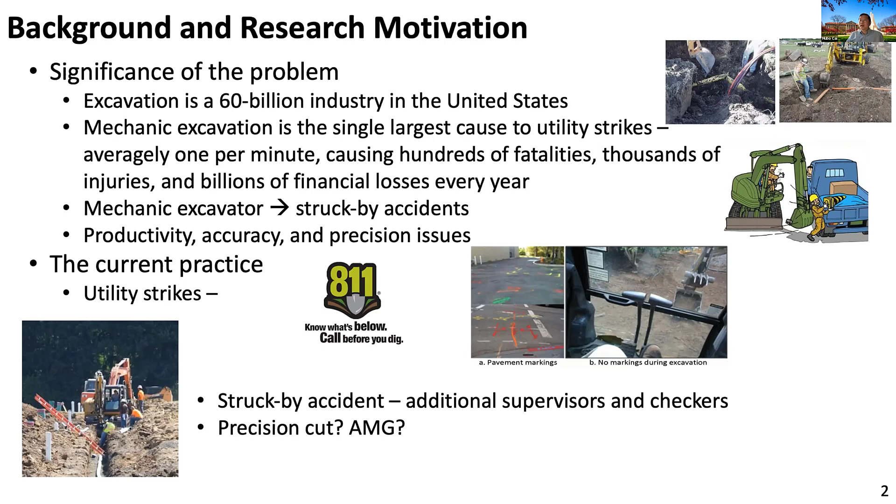So we blame all the recurring excavation accidents on the lack of accurate data regarding your buried pipes, lack of real-time tracking of the excavator and the job site entities, because many are changing and moving around, and also lack an effective communication mechanism as well as interaction mechanism, how you interact with the equipment operator, to make sure the person can develop a holistic situation awareness of what's going on regarding the whole process.

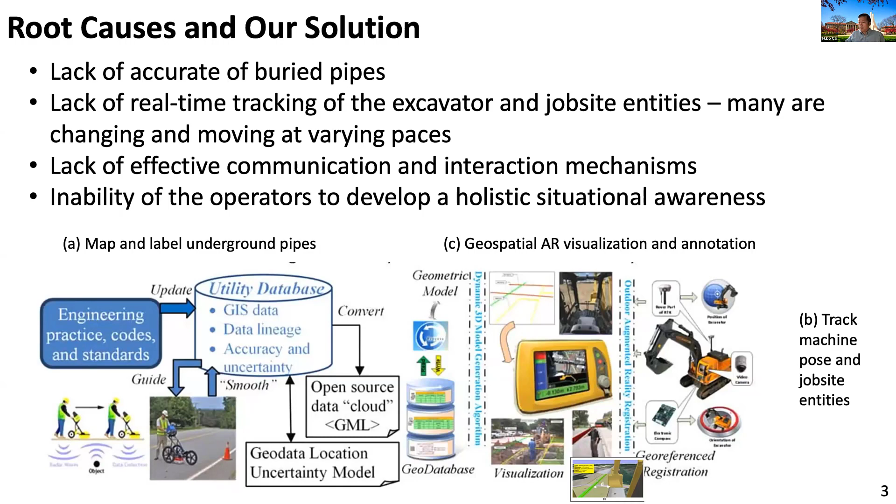So we are looking at this problem and proposing our solution in three compartments. The first is trying to come up with accurate and complete underground pipe data. The second part is to be able to track machine pose and job site entities. And the third piece is to look at geospatial AR for visualization and also multi-venue interaction with the operator in real time. So for this, the first part we did was GPS, GPR.

We use ground penetrating radar for detecting and mapping underground pipes. In this part we developed quite a lot of algorithms, including a drop flow algorithm for GPR signature detection, a clustering and deep learning algorithm to separate the hyperbolas into different segments, which allows us to correspond or connect different pipe orientations and directions with the signal there. We also developed a VIP, very important point, algorithm that handles scanning scenarios where your pipes are not perpendicular to your GPR travel trajectory, and you're dealing with uneven surface.

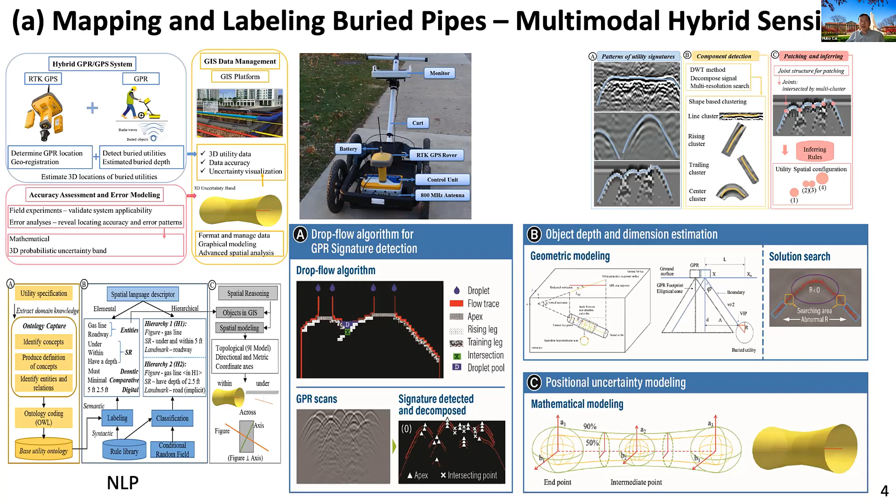We also input probability and modeling to capture the uncertainties of the data that you capture from your sensors, as well as the algorithms going through. This part, we also worked on natural language processing to deal with large textual documents, plans, and drawings, making sure that we have multiple sources of data that we can bring together into the data fusion process. So the whole ultimate goal is trying to be able to locate and map underground pipes, as well as measuring their material types and dimensions.

So the second piece is to deal with the above-ground dynamic and moving objects there. For equipment, we look at it at a relatively coarse scale. We are looking at the joints, and treating these joints as key-nodes, to develop a key-node model. This also allows us to run closed-form simulations in advance and come up with a large library of all the different images, and also leverage the degree of freedom concept to come up with two-pronged solutions towards the same goal, that is to track your equipment and its pose in real time.

For people moving around, we're looking at a hybrid vision and radio-based multi-worker detection and tracking system. This allows us to not just detect nearby workers, but also look at their IDs, and put them into the context for people who are supposed to be working nearby, or who are actually intruders that shouldn't be there.

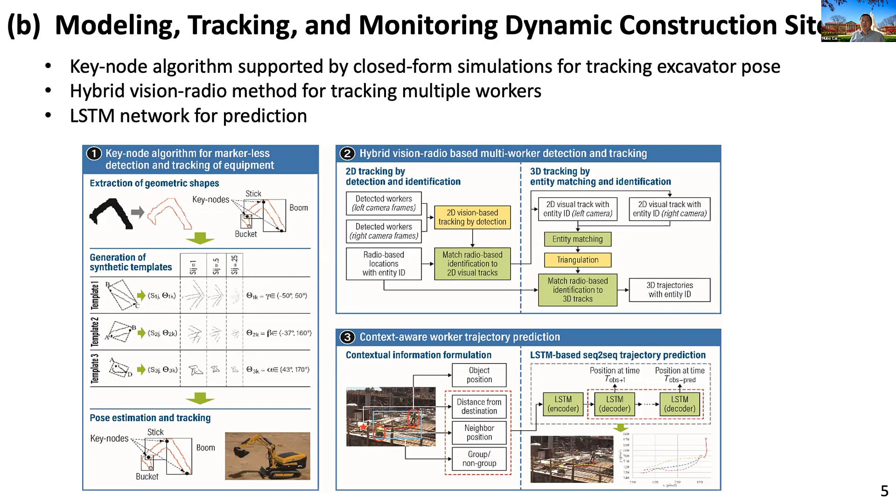So if you recall the image on construction safety, you end up seeing pedestrians walking by near the trenching job, which presents a big hazard to the job there. By bringing context into the formula, such as what task you're working on, what's your job role, this allows us to interpret your goal and intention when you're on the job site, and being able to predict where you're moving. This allows us to not just detect potential hazards in real time, but actually being able to predict your hazards in advance.

So the third piece is the visualization, as well as multi-venue interaction with the equipment operator. By putting all the previous work, including the underground pipe data, the nearby workers, and equipment movement, into geospatial AR, we were able to predict and detect those hazards, and bring out a holistic situation view to the machine operator in real time. So you don't have any more blind spots.

And the idea is that we are looking at multiple venue interaction mechanisms, in addition to AR-based visual annotation, or spatial sound. We can also use haptic feedback, and put sensors on the human joints, to mimic resistance and things like those. So the idea is we would like to realize near real-time synchronization through a concept called the digital twin, maximize communication effectiveness, but try to minimize the cognition load. As an operator in the field, they face extreme, tremendous pressure, right? You need to keep precise control.

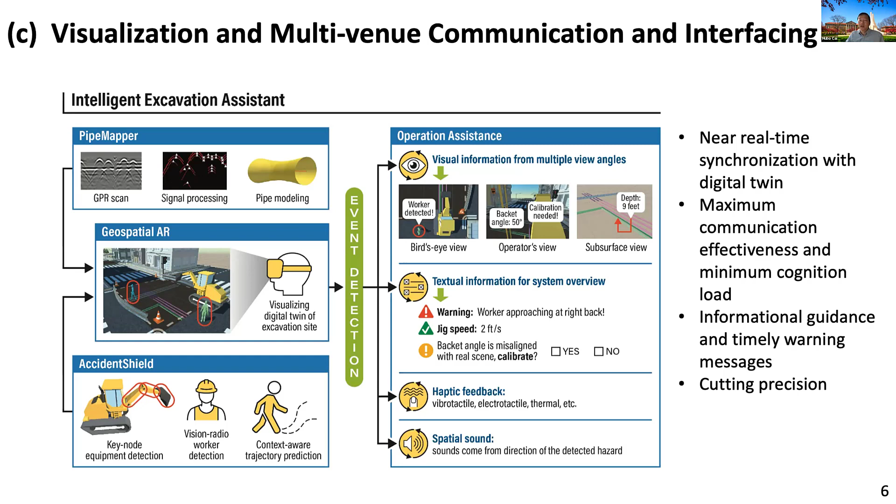You needed to be able to cut precisely and maintain productivity while making sure you don't hurt anybody - not just people, but also underground pipes and nearby structures. The digital twin concept allows us to bring design intentions, such as cutting depths and extent, into the model, visualized together with the bucket. This allows you to gauge whether you're cutting at the right place and depth, and whether you're getting the productivity you want. It also allows us to eliminate the observers who guide the operation, which increases the contractors' profitability.

Leaping into the future, this is something we are also interested in and currently working on. One area is building further machine intelligence in terms of excavation. A few concepts we're exploring include cloud-based learning, pre-training your machine through simulators, and also online learning.

The other area we're interested in pushing is realizing two-way synchronization. Previously we talked about monitoring, tracking, and controlling - sensing what's going on, coming up with observations, and then taking actions. But we would like to take actions through a virtual environment, meaning you don't need to be physically at the construction job site, but at a remote location. You can interact with the AR system, and the system will take your instructions and implement your commands in the field - sort of like tele-robotics, but supplemented with our expert knowledge.

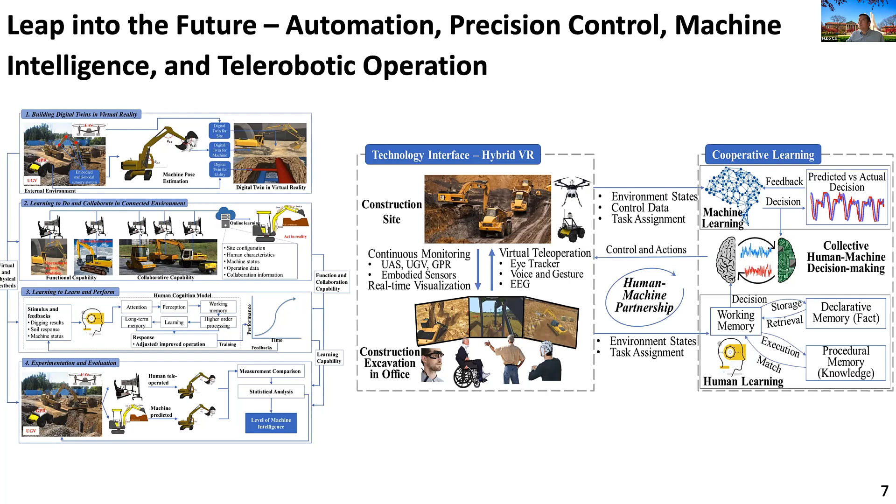I don't work too much in the ag area, but one interesting direction I'm always interested in is looking at how we can collect more data in the ag field, especially in the open ag field, leveraging drones. You can have a drone fly above, in between, on the canopy, and also have a ground vehicle traveling around to give you a holistic assessment of your growing environment as well as the condition of the crops.

So I think with that, that's all I have.

Perfect, an introduction. Professor Jian Jin received his PhD in agricultural engineering from Iowa State University. Prior to joining Purdue, he conducted research at DuPont Pioneer, now Corteva, where he was most recently a technology leader working on automatic phenotyping and sensing, and led a team for the company's hyperspectral imaging systems for automated plant screening. Dr. Jin's major research interest at Purdue is to build the next generation of automatic crop plant phenotyping systems, along with machine vision, data processing, statistics, and big data modeling.

So Jian, the floor is yours. Thank you very much, thank you for the opportunity.

Before I start talking about our crop plant phenotyping sensors, I want to let my John Deere friends know that I had a lot of former ties with John Deere. Although I don't have any current project with John Deere, my PhD projects at Iowa State University were sponsored by John Deere. I was in Dr. Lie Tang's lab, working on coverage path planning software development.

I also worked on putting a lot of laser sensors in arrays, trying to scan the stems of corn plants and do population mapping in the field. After that, I also worked with Dr. Stuart Birrell at Iowa State, working with the Urbandale station. I remember at that time the station was still called Intelligent Vehicle Systems, and I believe that is now being led by Mark.

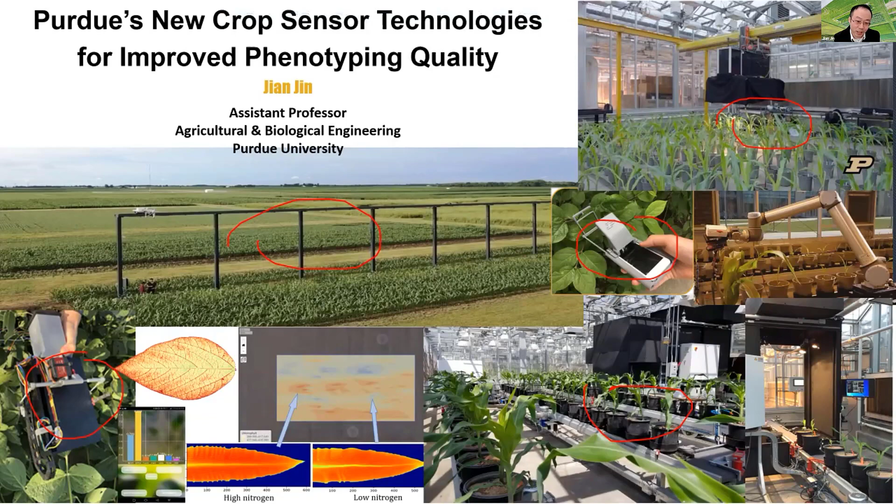All of these systems are focused on one technology named hyperspectral imaging. For those of you who are not very familiar with hyperspectral, you probably know grayscale image and color image. Comparing between these two, color image contains way much more information. You can see the green leaf, the red apple - chlorophyll is going on here and anthocyanin is going on here. So way much more information from one band to 3 bands.

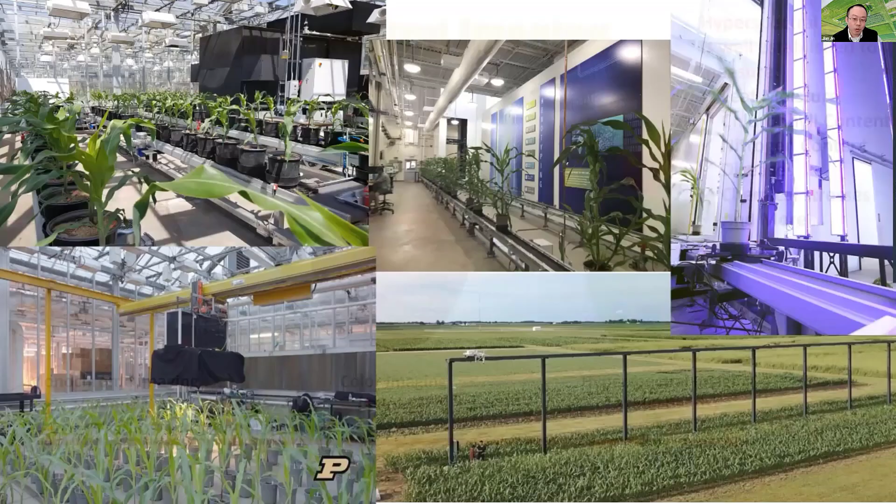However, if you keep going forward from 3 bands to hundreds of bands, you actually get way much more information. That is why hyperspectral imaging is already well established to measure moisture, nutrient, disease, chemical stress, and all kinds of other things. And that is also why we invested a lot at Purdue to construct hyperspectral imaging facilities.

The last 5 years were very exciting time, and it's really a pity that during this pandemic you cannot come here, but in the future, if you have any opportunity to visit Purdue campus, I would love to tour you through these newly constructed facilities, fully automated and high throughput phenotyping systems.

Just want to show you how we can use these systems and what we can do with them. Of course, we take images of the corn plants and the soybean plants, and with the hyperspectral signal, we can predict a lot of different things.

For example, we can predict biomass or fresh weight very well. You just need to take one scan, non-destructive, and we can do this kind of very precise fresh weight prediction. We can also predict NPK, all kinds of nutrient levels, and we can predict relative water content or leaf moisture with quite good quality as well.

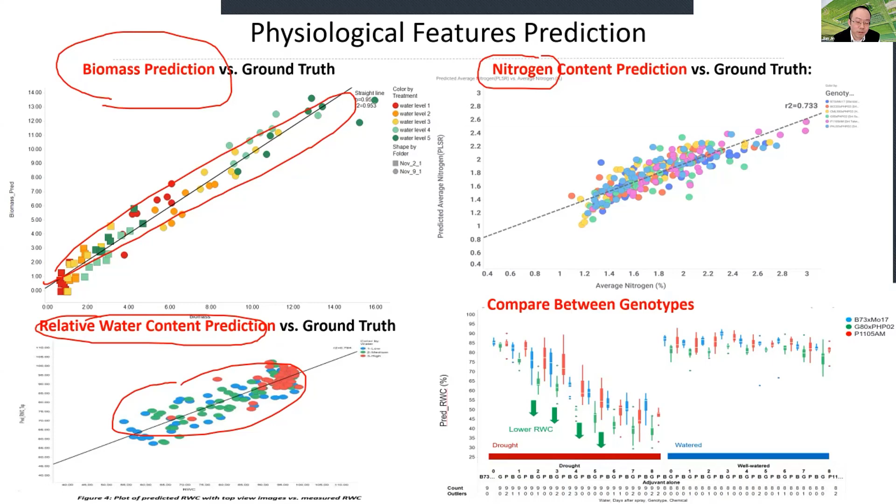With all kinds of these models, we can apply this in different kinds of projects. For example, if we want to help the breeders compare between the genotypes, we can apply the relative water content prediction model.

In this example project, the x-axis is the time dimension. Basically, from the first day we stopped watering, the plants should become drier and drier over the days. You can clearly see the dropping trend between the different genotypes - each color is one genotype. The breeders can clearly see which genotype is dropping with the fastest speed, meaning that genotype is not a good one for drought tolerance.

Beyond these models, we also evolved a lot with the hyperspectral imaging technology and collaborated with other researchers for disease and chemical predictions. One example is that recently we developed some models to differentiate between the different modes of action from different herbicides.

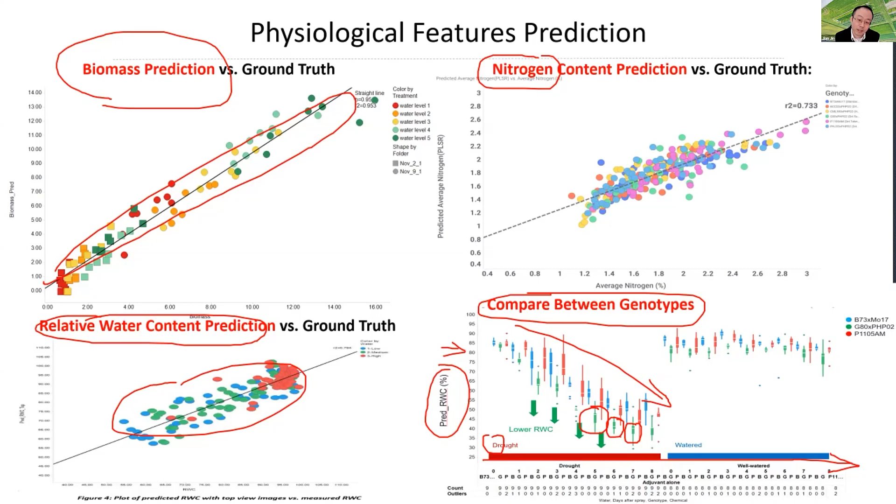If you spray dicamba, 2,4-D, or glyphosate, you don't need to tell me which chemical you sprayed and how long after the spray it is. You just give me the pot - I take one scan, and I can very confidently tell you which chemical you sprayed.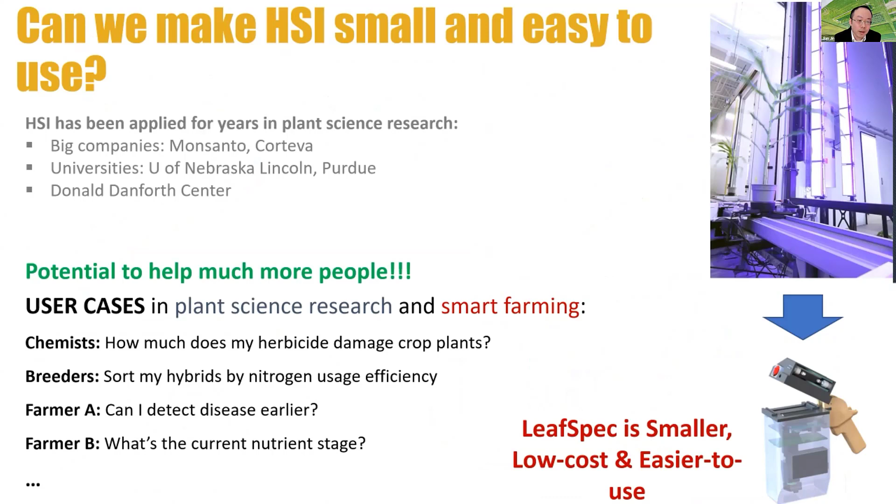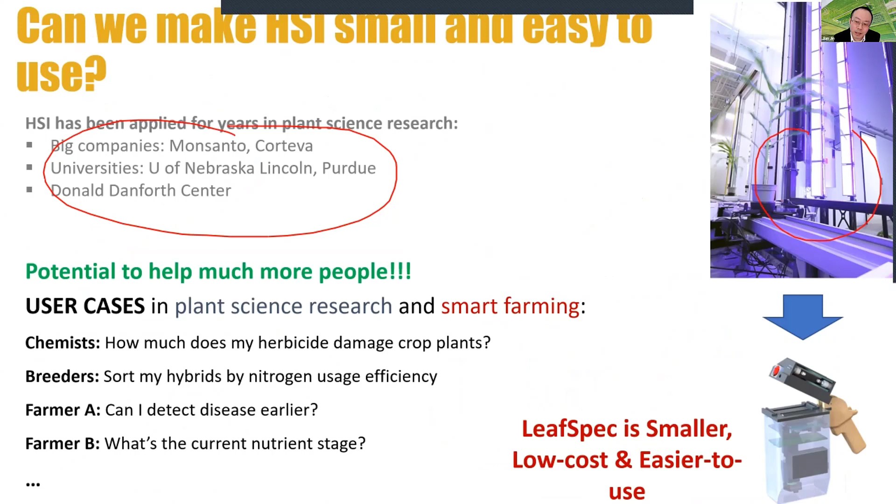With that good technology, there is still some limit with those facilities, because only big companies and big universities can afford those technologies. We still want to help a lot more people. So here is the idea: can we implement both the hardware and software technologies from those expensive big facilities into a very small handheld device, so everybody can use it at a lower price?

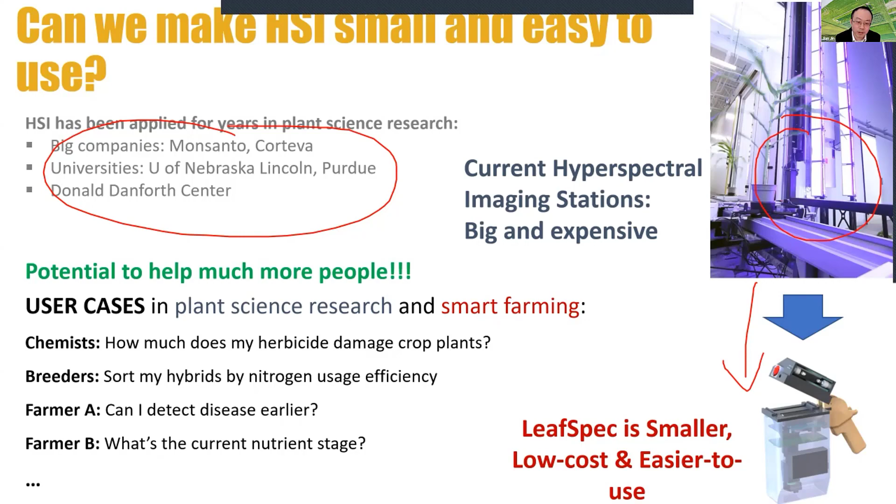The good news is we made it happen. This is a device named LeafSpec, which we just released about 2 years ago. It takes only about 5 seconds for you to slide over a leaf, and after just a few seconds on your smartphone screen, you can very quickly see all the results - nutrient and water.

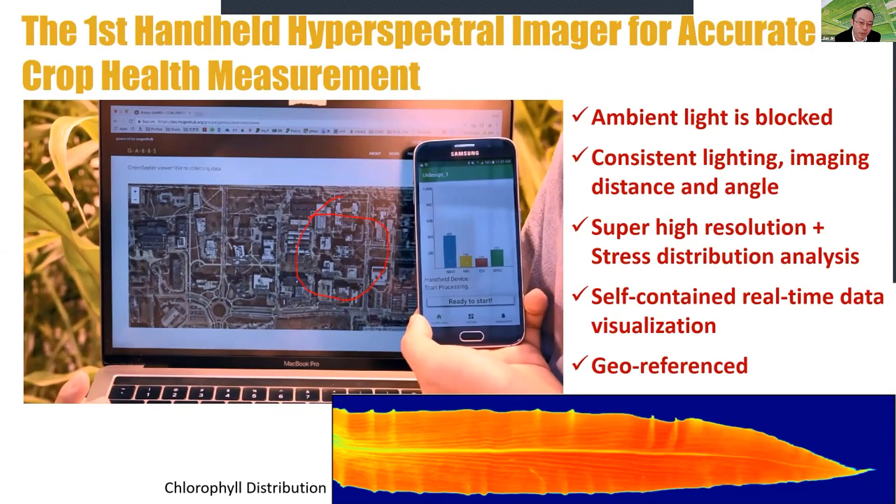And each measurement is georeferenced. So imagine if, this one is in the greenhouse, but if you are scanning in the field, you can start to collect all the dots and build all kinds of maps.

Another benefit of this kind of hyperspectral imaging sensor is that you get very beautiful high resolution hyperspectral images. So comparing this kind of sensor with drone images—drones are so popular now—this is basically a comparison between remote sensing and proximal sensing.

The dilemma is basically between quality and throughput. If you fly very high, you can cover hundreds of acres every day, but you are suffering from all kinds of changing environmental conditions, lower resolution, and the different gesture of the leaves.

One thing many people don't know is that when you rotate the corn leaf from 0 degrees to 80 degrees, for example, your NDVI measurement can vary by 3 times. That's 300% variance—that's a terrible noise and variance.

But with this kind of handheld device, ambient light is blocked, and we have consistent lighting conditions, angle, and distance of the imaging. And also we have some of the other benefits.

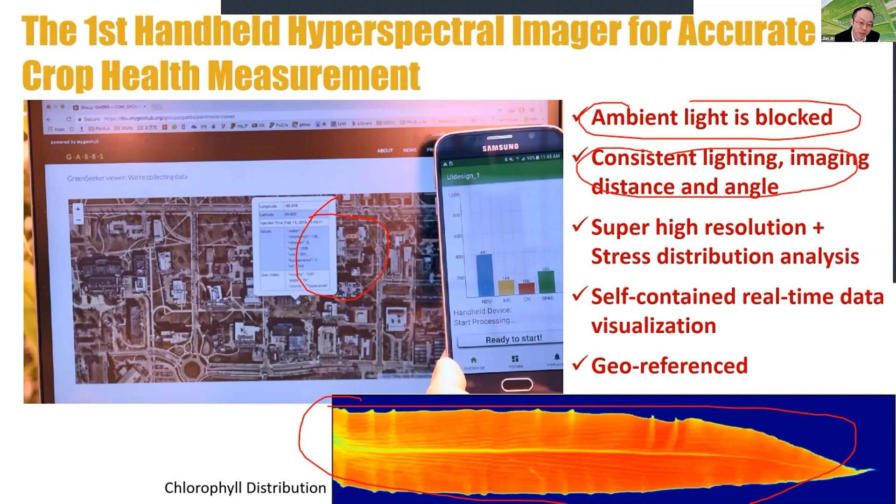So yes, we made it easy for people to use, but at the same time, we produce much higher quality than the traditional technology. I just want to show off the high resolution of this LeafSpec on a corn leaf measurement—we can see all those textures.

And these resolutions are also very important in signal, because traditionally you just average through the whole green leaf and use the average color to predict something. But actually the variance and distribution of the nutrition and stress on the leaf is really important signal. I don't have time to elaborate too much, but one conclusion is very clear: this kind of distribution analysis really helps us predict phenotyping features much better.

So just to show you, if you do that in the field, what you can get from the digital map. I know it sounds a little evil, but sometimes in the hot summer the students are scanning in the field, and I'm sitting in the air-conditioned office, and I can see the dots showing up on the screen. I know they are working, and I know when they may have some problem and the process just stopped.

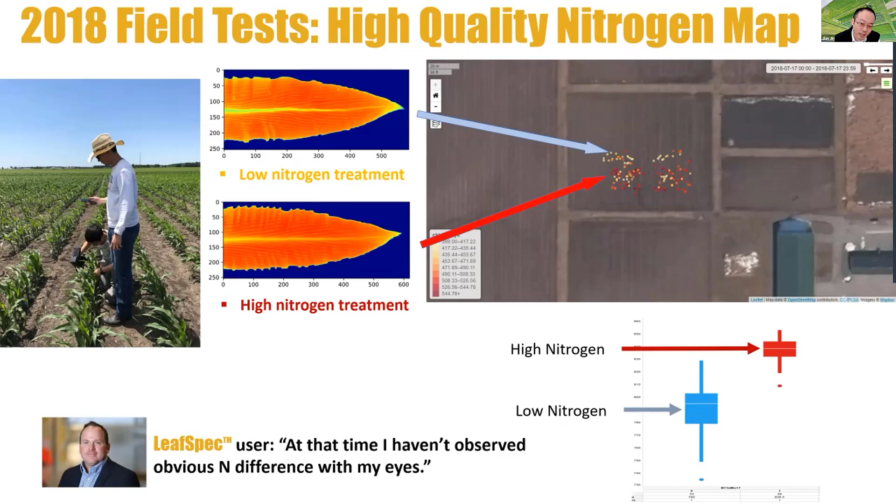Immediately at any time we can generate all kinds of these maps, and these maps are dynamically changing as we collect data. We also want to make things automated, because I don't want too many people to be working there.

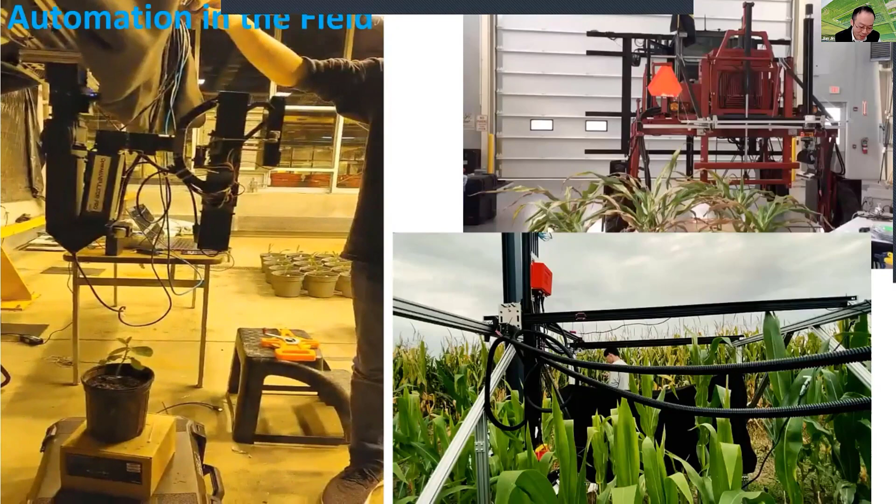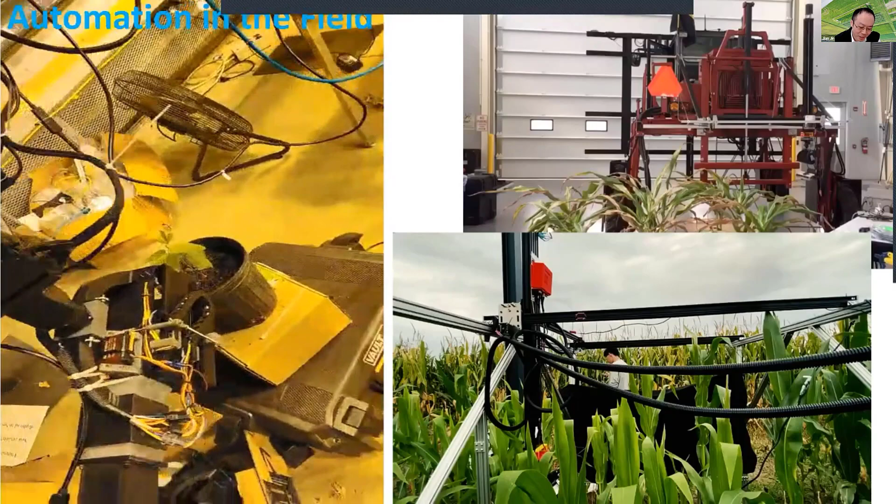Scott just mentioned that you like to work and get dirty in the field—we also like to do that, but that doesn't mean it's easy. I still remember that especially in the later stage of the growth in the field, sometimes you really need to take a big breath, cover your face, and push yourself into the bush. That is not very easy.

So we put the handheld device also onto a robotic arm, to make it fully automated. As you can see, we use machine vision to automatically detect the target leaf, which is a top mature leaf for both soybean and corn, and we can automatically scan it.

The throughput is still to be improved, but we also try to implement the robotic arm behind a vehicle. I'm sorry this is not a green and yellow vehicle, but if you are interested to put this sensor onto your RC vehicles, I'm very interested to talk with you about future opportunities.

So this is just some additional information about this technology. We're filing patents and trying to commercialize it, and this is being adopted by more and more companies now. So that's all what I have. Thank you very much.

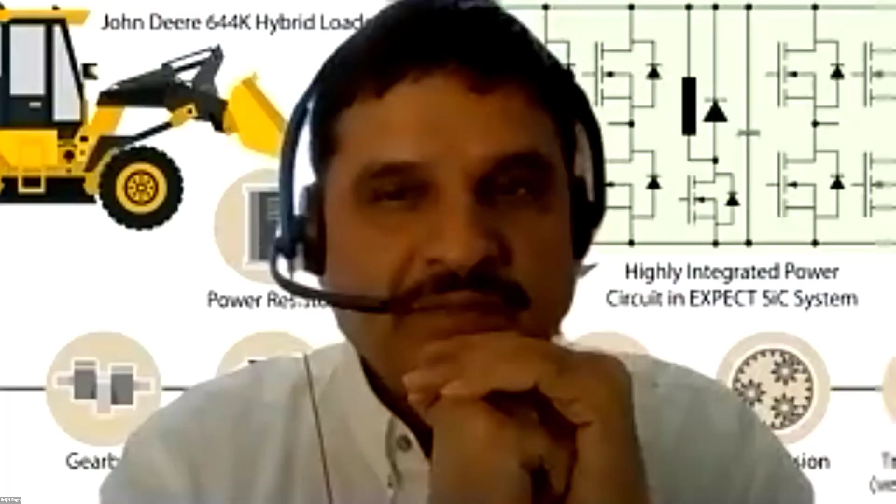Mark, please go ahead. So the role for automation and humans working together, that's the context of the question. Where do you see this going, is it going to be a purely human perspective?

Great question, and it's not a simple answer, as probably many of you are aware. It's going to be varied. In the jobs our customers are doing today, over the next 5 years, we are working to make their jobs easier, but not change the jobs that much.

For example, today we have lots of operators of machines, and they're managing not only getting that machine set correctly to do the job they need for the output they desire, but they are also managing the rest of their operation, whether it's grain logistics flowing out of the field to the bin sites, or trucks coming to a construction site to move dirt or asphalt.

What we're going to be doing in the next 5 years, and have been engaged in, is moving them from that mode, offloading the settings of the machines by automating that part, so they can actually dial in the output of those jobs and manage their businesses and operations much better. So building trust with them to automate the settings and let them adjust the dials for the desired outputs. That's kind of the first step.

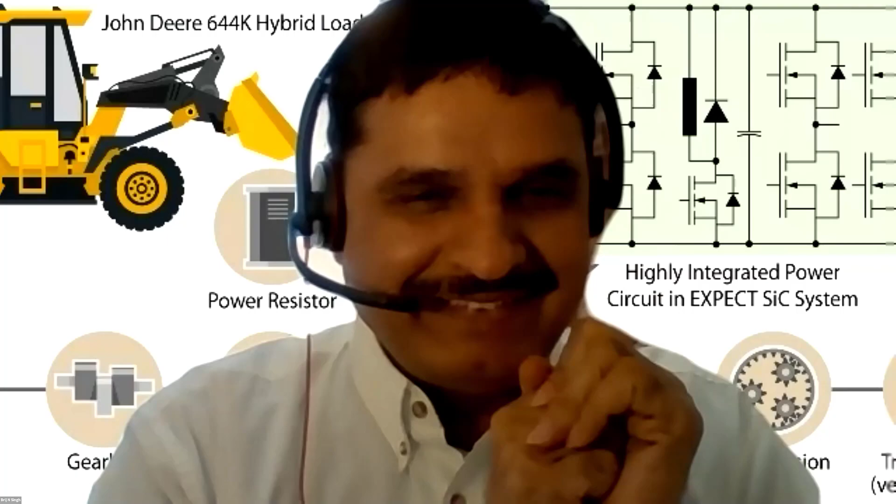But the big focus right now is to offload them and build trust. If you don't start building trust from the beginning, which is a huge user experience challenge, it all falls apart. So it's very critical that the tech is cool and needed, but the user experience is as valuable as the tech.

Correct, to get it right. What I wanted to add was that if you make people's life easy, they are going to adopt the technology, even if it comes with some premium cost. Make people's life easy, right? And Mark is saying that it's like a trust.

So it could be a possibility that you develop advanced software and teach the job, the machine learns the job, like a very expert operator doing very high productive, high performance work out there, and then the machine learns it and repeats it. So basically what that means is now the operator is doing something better, planning, observing, versus paying less attention to how they could be productive.

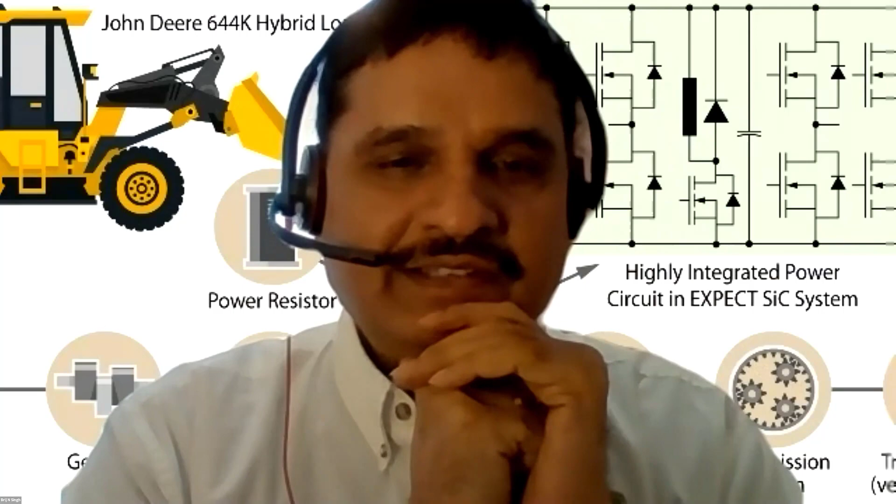So it could be a combination of both. And then eventually, as Mark is saying, when trust gets built up, then yes, these vehicles could be remotely operated on both sides, ag and construction and other vehicles. This combination requires so many things like sensors, advanced computing, data fusion, you name it—all those points we hit in this presentation that we had.

Very good. Any other perspectives on that from the Purdue team? Hi, this is Shaoshui. Hi, Mark.

It seems to be very challenging to do if purely based on video or images. Another question is whether you guys think about involving wearable sensors on the human operators, so they could actively measure the distance away from the machine, then maybe give an alert or warning when they identify potential safety issues.

Yeah, so your second point, I'll address first. Yes, vision cannot do everything we're wanting to do alone, and we're looking into multiple types of sensing opportunities to fuse with vision. Millimeter wave radars are coming into play—we're investigating that.